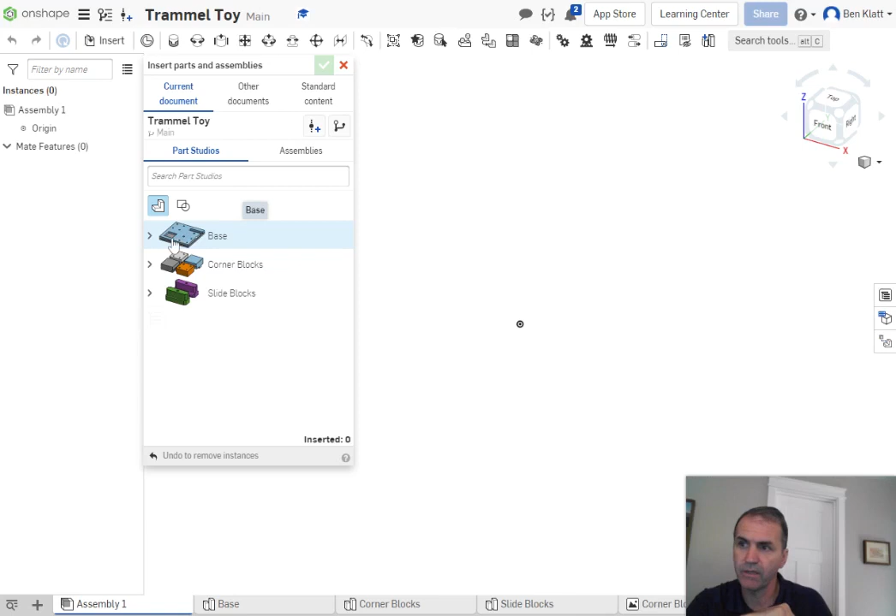So let's insert the base. Now, the base consists of two parts. If you expand this, there are two here, but I'm going to bring this in as the part studio that contains both at the same time. So we're going to click on this base and bring it in and click it.

Now, don't do what I'm about to do. First I'll say okay, but I'm going to show you that these are two separate pieces within the assembly, so you can actually take one and move it. Don't do that though—if you did, let's hit undo and get it back so that it's together. Now I want these to hold together as they are.

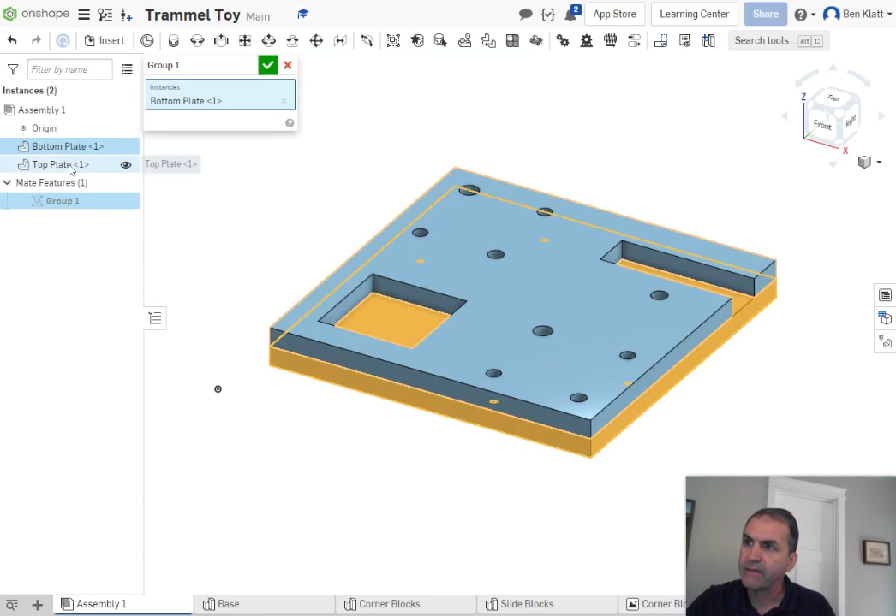So the way to do this is to come up here where it says group, and the instances I want to group are the bottom plate and the top plate. Hit OK, and now those are held together. We could have mated them, but it's just easier to group them so they stay together.

Now, it's also a good idea—turn off that origin, it always annoys me—to have a bigger piece fixed in an assembly. So we're going to take either one of these, it doesn't matter which one, and hit fix. It will show that that is held in place, and now I can pan, but I can't move it apart, okay.

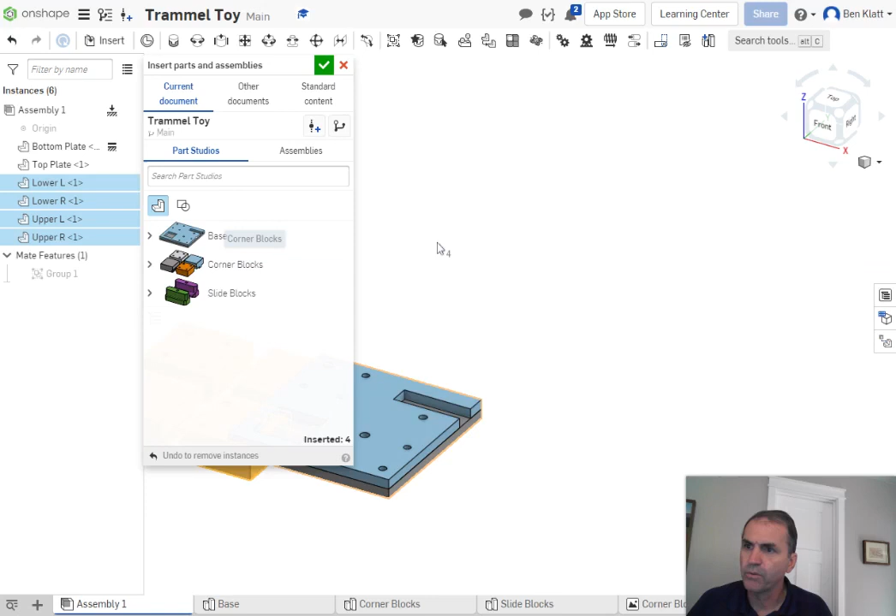All right, now we're going to bring in our four corner blocks, kind of like we did before, at the same time. I'm going to zoom out a little bit just so I can have some room in here. We're going to insert those corner blocks. Now again, I'm going to choose all of the corner blocks at the same time, not individual pieces, and bring them in. Click, now say OK.

Well, before I move anything, I want to group them together just like we did the other ones. I'm going to group the four blocks—lower left, lower right, upper left, upper right. All four of them are going to get grouped together. Okay, so now they move together as a unit and they're locked together in that position.

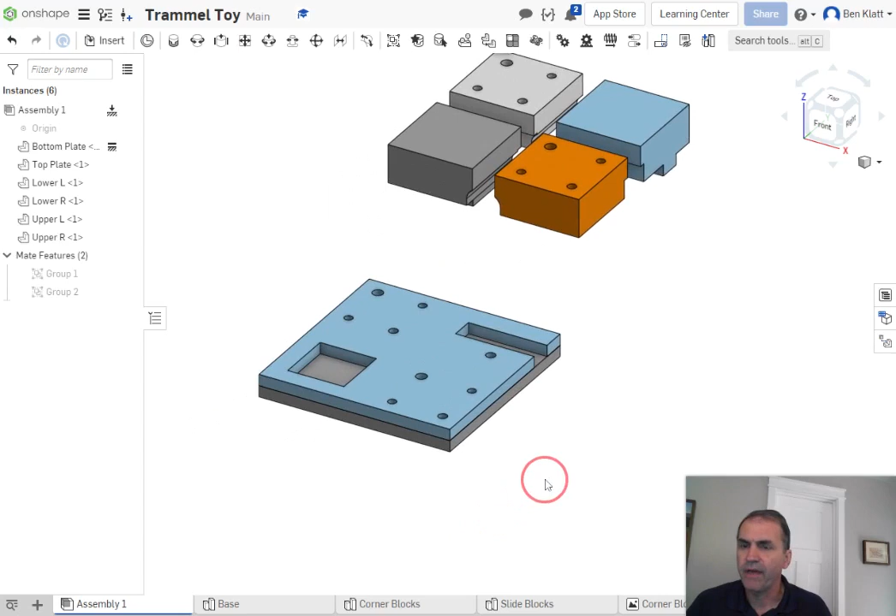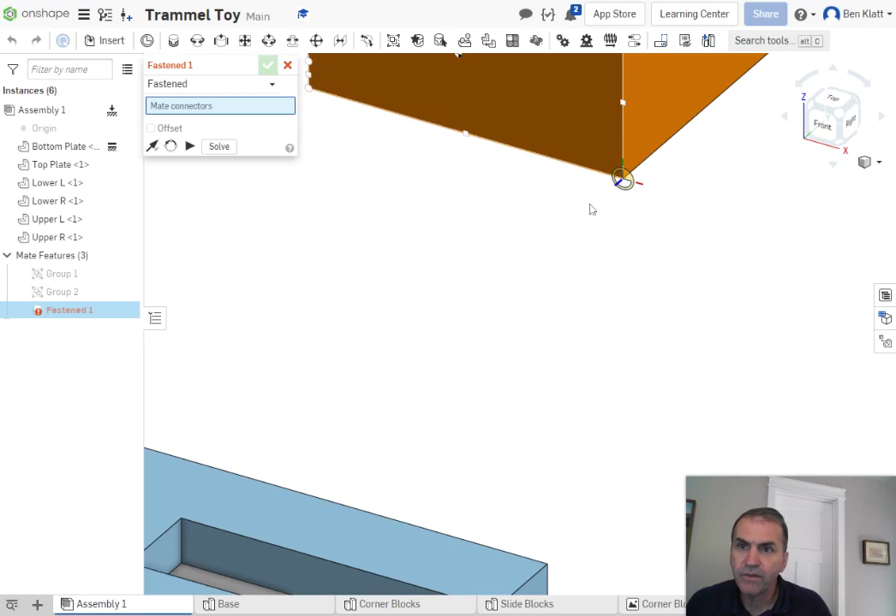Now I only need one mate since I grouped them to hold these down here. I think I'll just choose this corner right here and that corner right there to do my fastened mate, which will lock those together. If I zoom in, I've got to make sure that your little mate icon shows that right now the blue little z-axis is going this direction, which is what I want. Click, and I need to make sure that axis goes the same way down here on this corner.

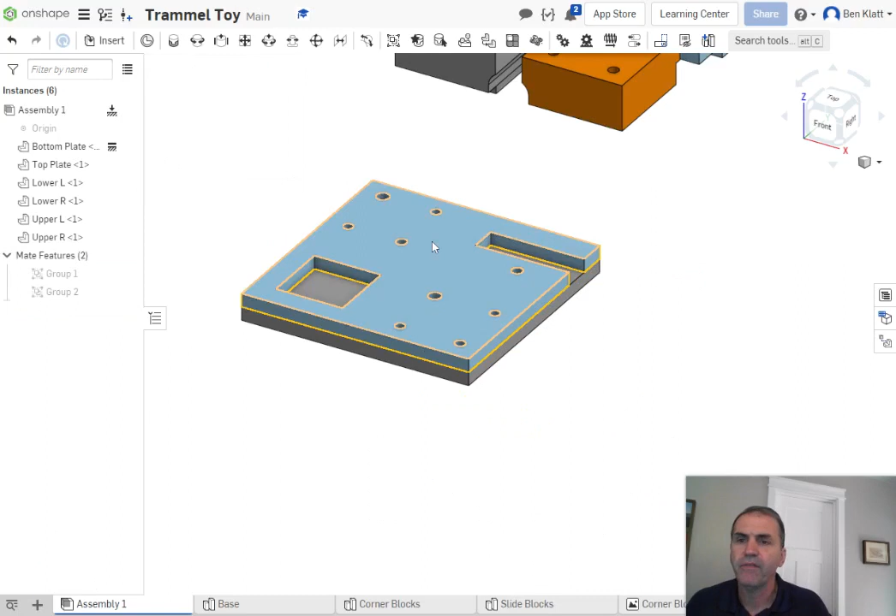Let's do it wrong first—let's have it go the wrong way. Whoops, you know, now it goes the wrong way. Now you might be able to do something like, wait, which way do I flip it? I don't know. So rather than that, let's just make sure we've got it right the first time.

Fasten mate—make sure that the little arrow, the axes, are pointing the same way. Sometimes you have to hover around a little bit. And that looks good. All right, cool, so now those guys are locked together.

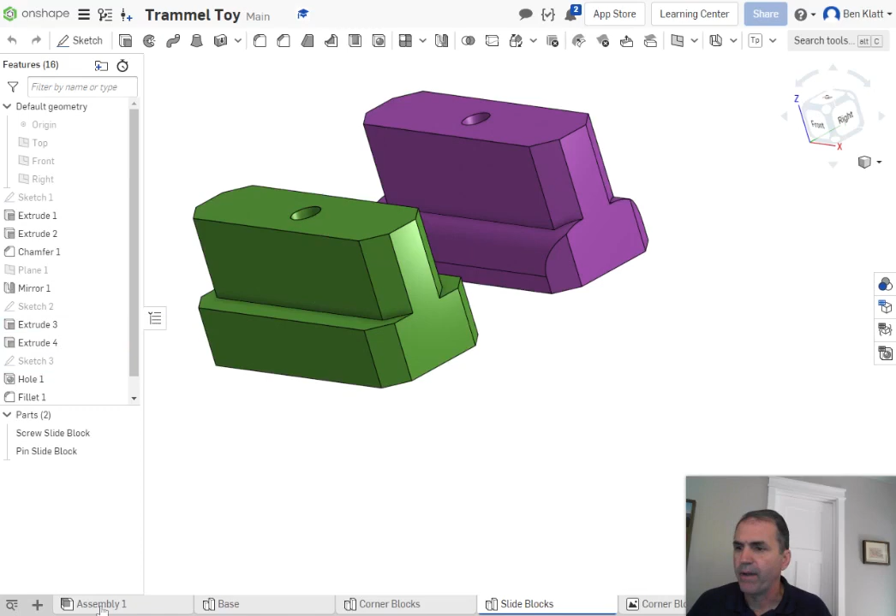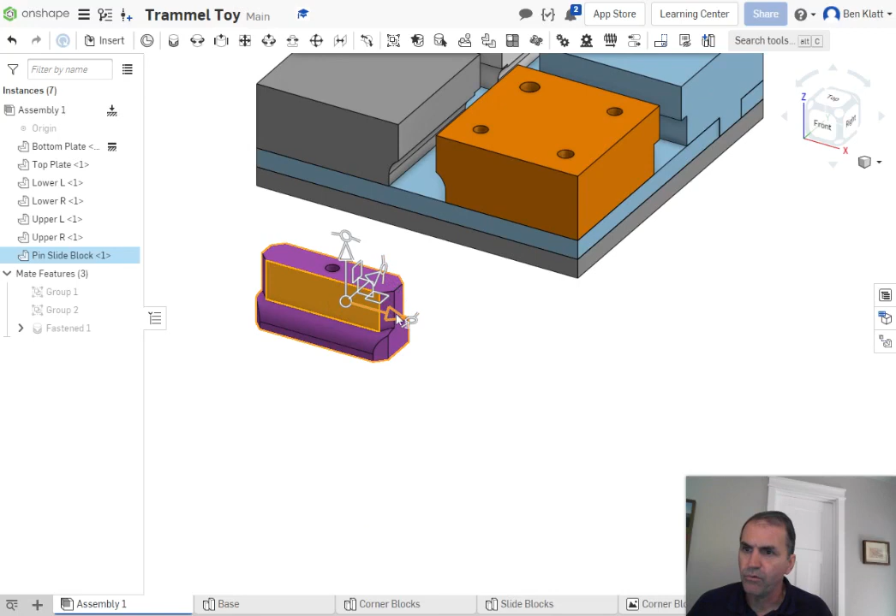Now, we're going to bring in our slide blocks. I'm going to do these one at a time. So, whoops, I didn't mean to go back to that—I meant to stay in my assembly and insert slide block, but this time I'm going to expand that and bring in just the pin slide block. Bring it maybe down in there. Now, if it bothers you that it's not facing the right way, don't forget that you can click on a part and use these tools to move it or rotate it. So I can move it around so that it's facing the right way. I don't have to do that.

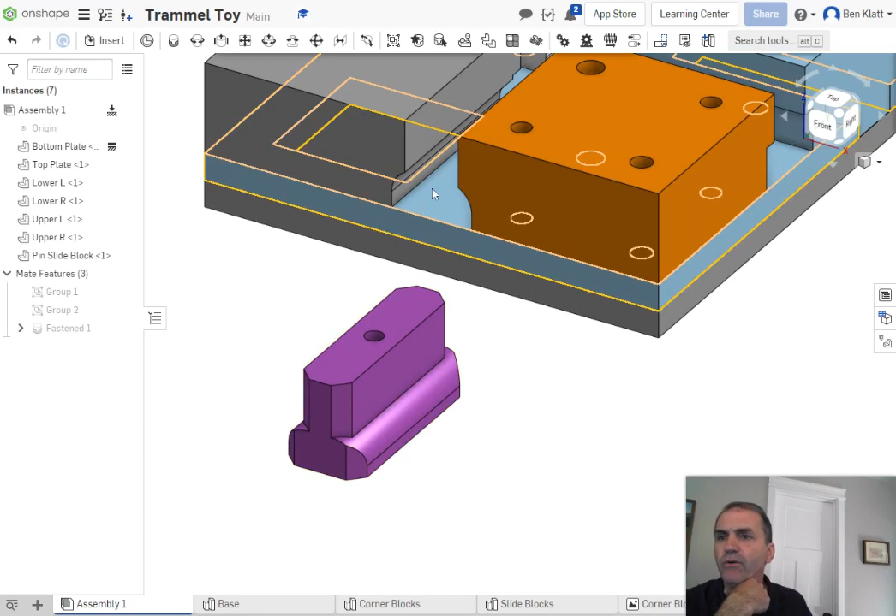But it just makes it a little easier to see. Now, this time, we're not going to do a fasten mate because these are called slide blocks for a reason. They slide, right? And if you'll remember, there was some clearance that we created when we made these so that it's not fitting perfectly in the space, but it's got a little gap.

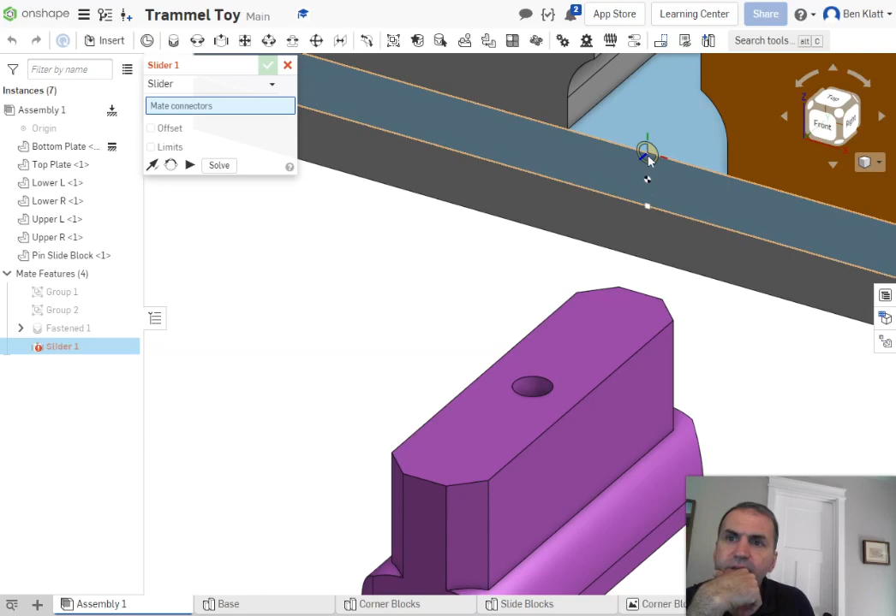But it will sit down flat on this surface and in the middle, hopefully. So we can take our, up here is a slider, that's what we want. And the two mates are going to be, one is going to be right there in the middle. Notice it lines up with the center of that click. And the other one will be the middle bottom of this one, making sure again that it faces the same direction with that blue Z-axis.

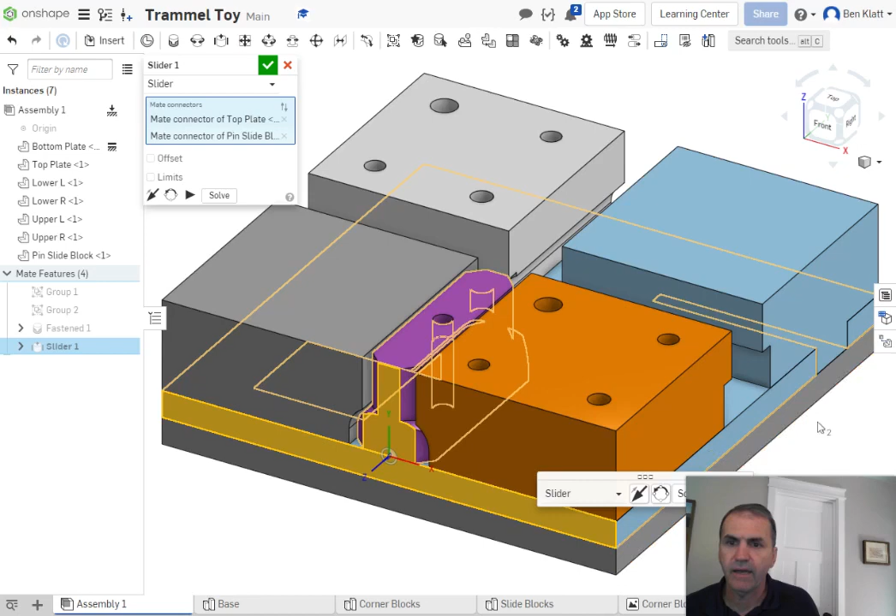Click. Now, it went away, but I'm going to be able to zoom. Okay, bring it back and say, okay, looks good. And now, once I've got that done, I don't want another slider mate right now. You should be able to grab that part and slide it along that axis that we created.

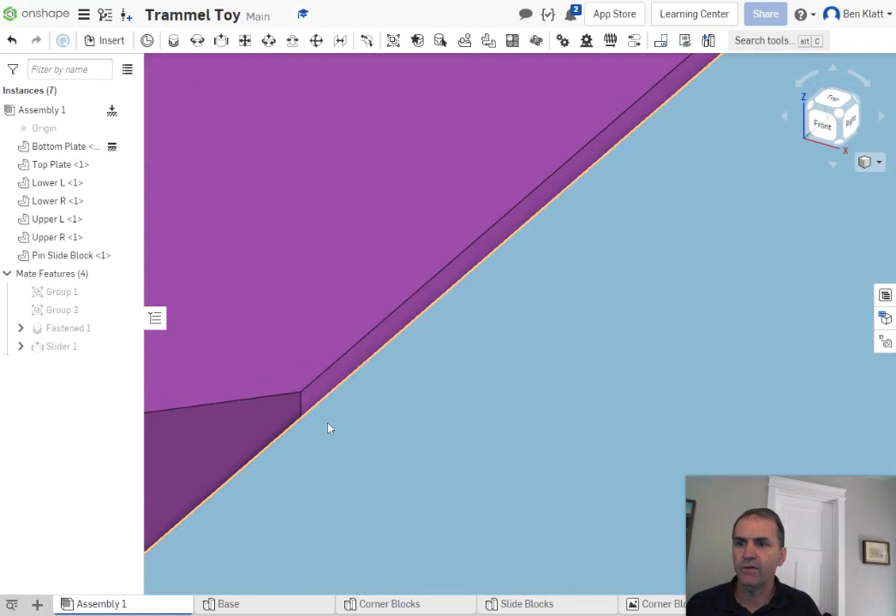Cool. Now another little side note is that we did make this, notice that this piece sticks up above, and that's by design, it's on purpose. And if we look really carefully, I'm going to look at the back side, notice that there is space. We created some clearance for that to be able to move around in there, okay, on all sides. There's a little gap there, a little gap there. If we were to 3D print this, we need to have some clearance.

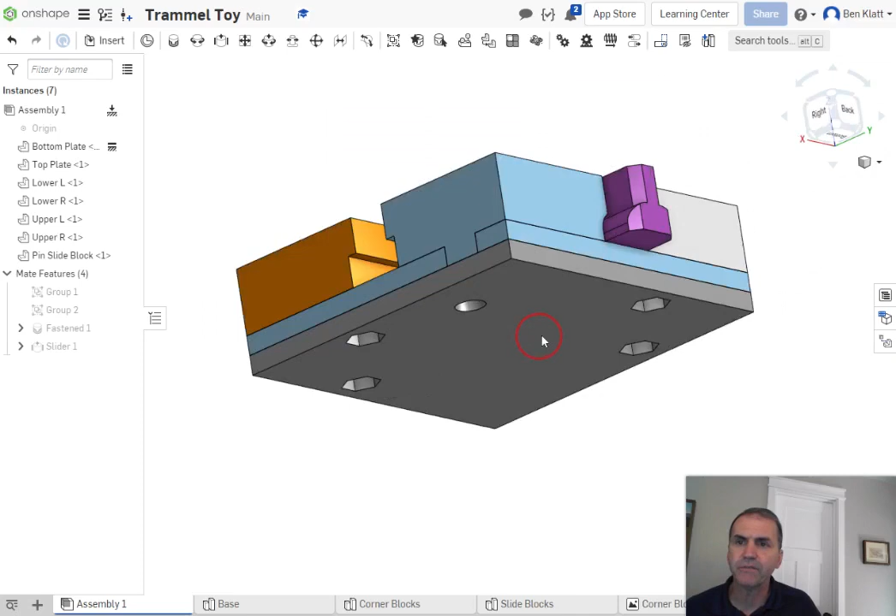All right, there's slider number one. Slider number two, I'm going to show you a problem that we have with this. When we bring in slider number two, whoops, let's insert the screw slide block. Bring it in here. Now it's already kind of oriented the right way.

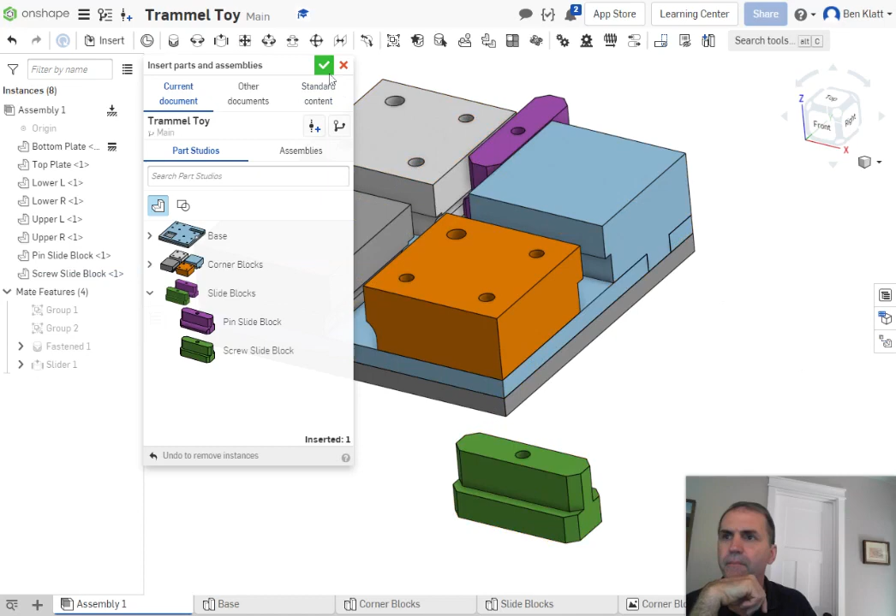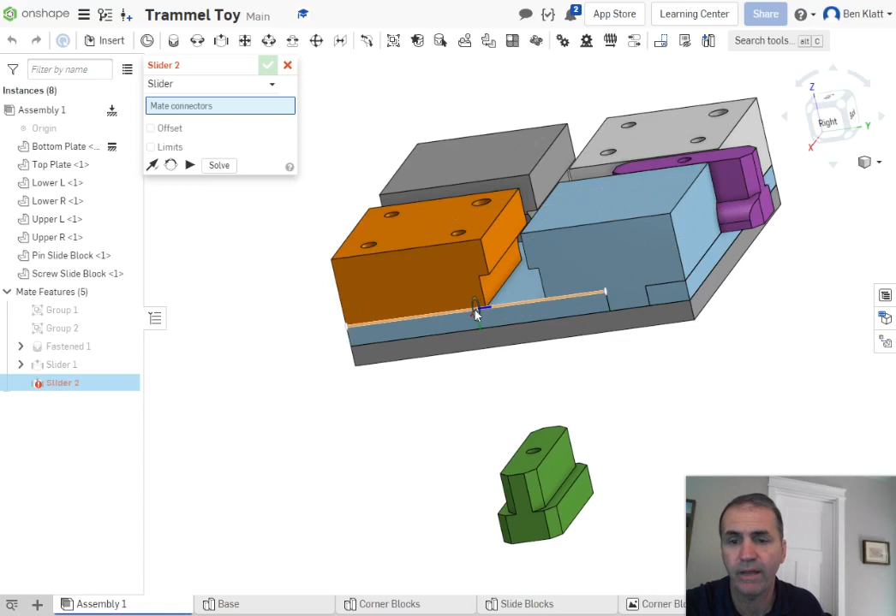Now, if we do this on this side, we have a problem, because if I go to do a slider mate and I go to put my piece on here, the problem is that the middle of this piece, because it ends over here, is not in the right place. So we have a problem. Now we could move this over to the other side, where we do have nothing interfering with the middle of this, but because we may need this later on, let's show how we can solve this problem.

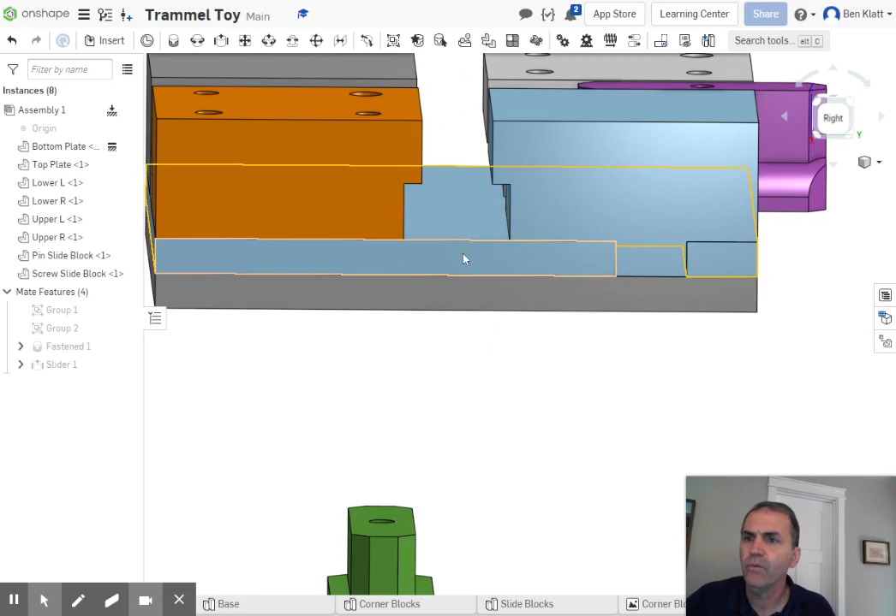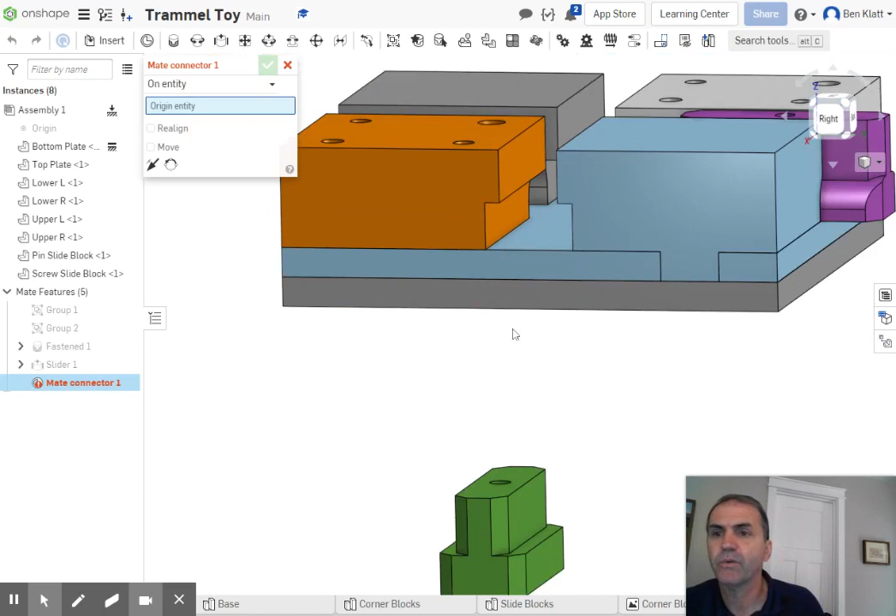So we don't have the ability to put the slider thing there, but we can make our own mate connector. So up here at the top, there's this little thing that almost looks like Pac-Man to make a mate connector. Now, it only wants to put it the same as those other ones, but I'll be able to move this. So we can put it in the middle, right on the top of the bottom plate. Click, okay? But now notice I can move it.

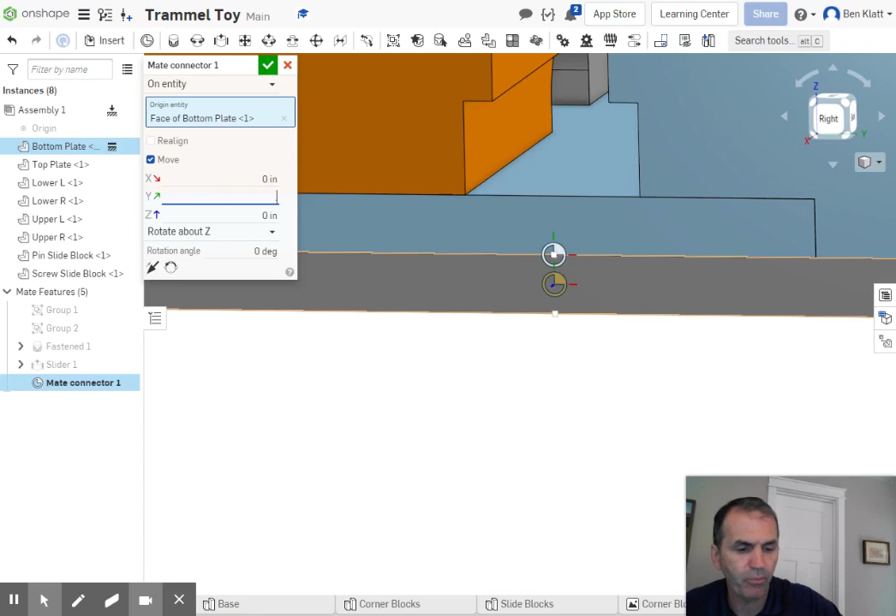So I'm going to move this, and it says, which way do you want to move it? Well, the green axis, the one going up, is the y-axis. So I'm going to move that in the direction of that, 0.25 inches. Enter should give me a little preview, and that is where I want that to go. So I've created my own little connector for that.

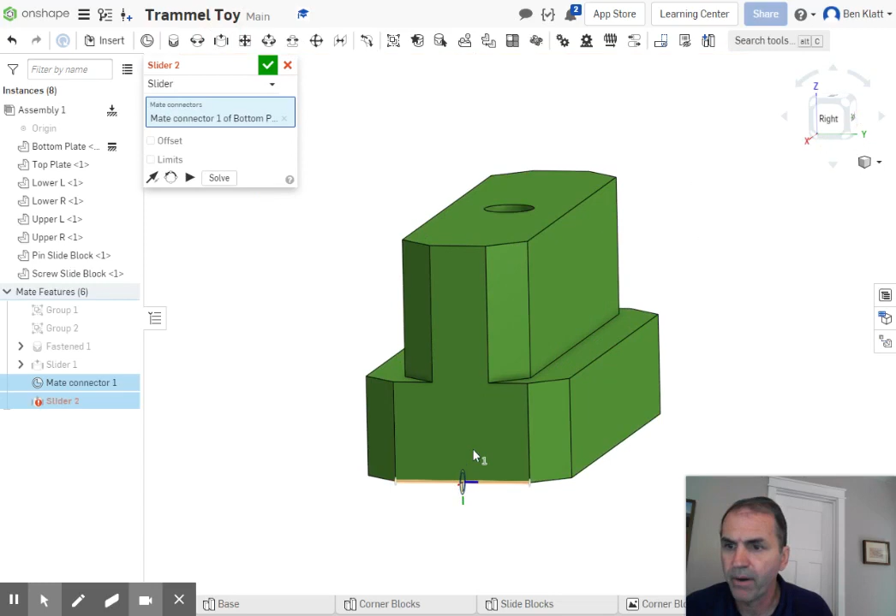Cool. All right. Now next is we're going to create a slider mate again. And this time we're going to use that same connector that we just used and the bottom middle, just like we did before, of this one, making sure that the axes go the same direction. And good. Okay. Now that mate connector will show up until I go down here and just turn it off. All right, so now I've got my slider and my slider. Cool, that's going to work out really well later on.

Unfortunately, we're not going to get to that today because it's going to take too long, but we will get the crank arm on there and get it all moving. All right, now we are missing our pins and our little hexagonal pins.

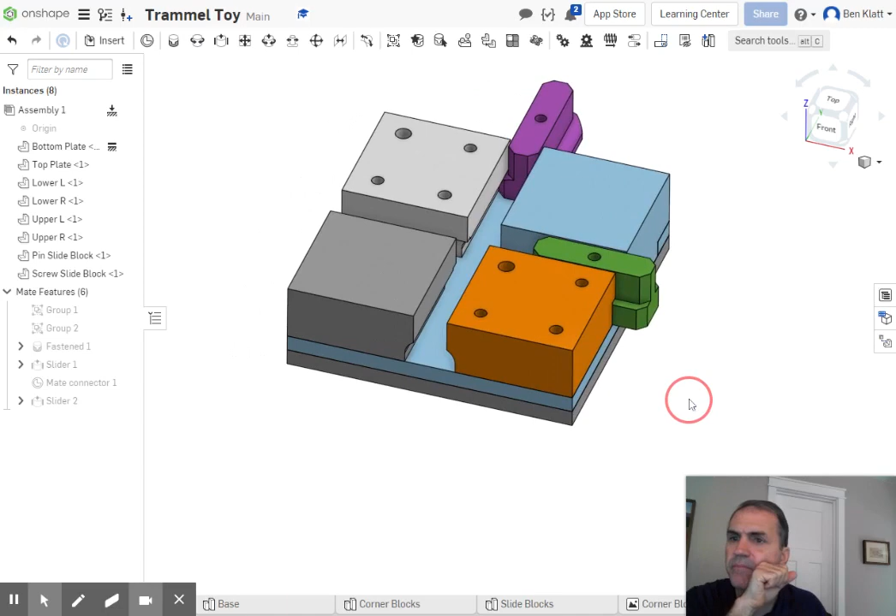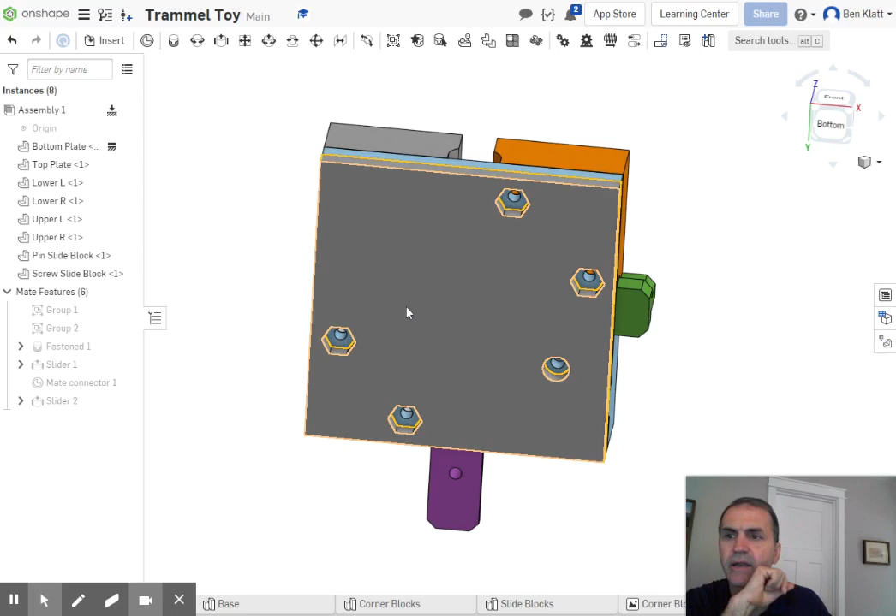Now these are not bolts, they're pins with a hex head. You can't do a bolt because how are you going to screw that on there unless you bolted everything on there first and then glued this plate on next, which is a possibility, and that's a way that you could get that done. And maybe that's the way this is put together, but I am going to do this.

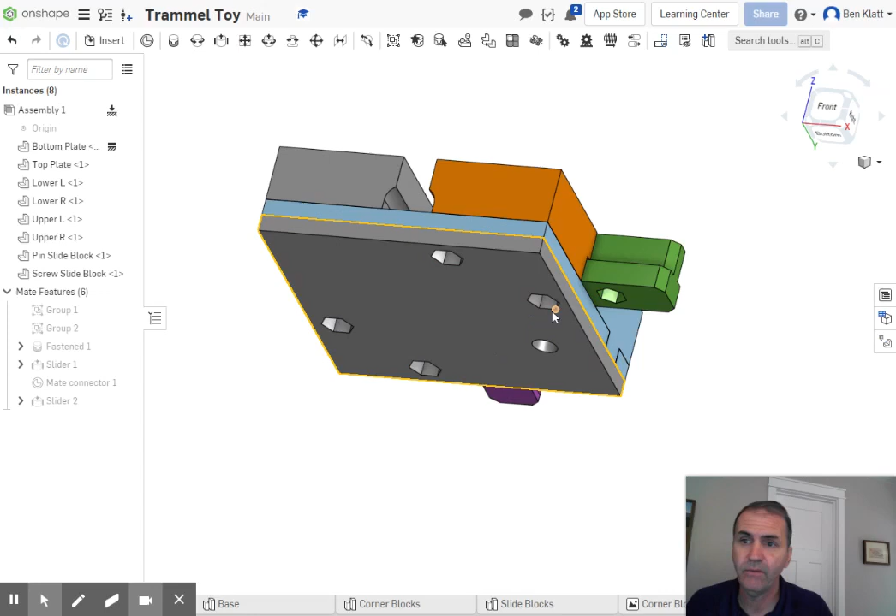I'm going to build my own pin and my own hex pins. Now this one also has a hexagonal shape, but these two hexes are actually different sizes, so we're going to have to make those separately. All right, now the easiest way to do this, I think, is to use that sketch again that we made these hexes on and use that rather than having to resize and measure and all that sort of stuff.

So let's do this and start a new part studio. We're going to call this part studio rename it, and call it Hex Pin Block. We need to call it something that I recognize is different than the other pin we'll make later on. Now I'm going to sketch on here, but first let's go to the base.

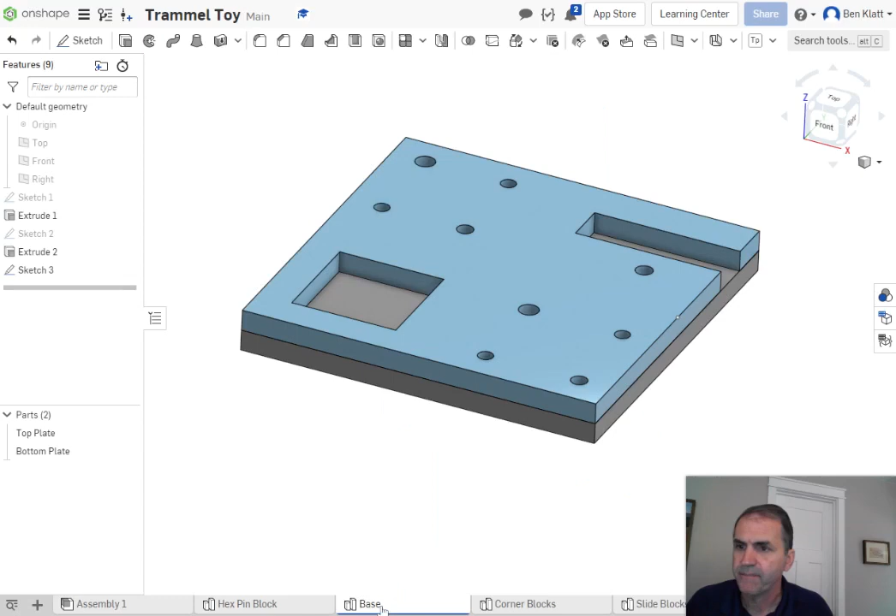Somewhere is a sketch that has these hexes in it. If you hover over, it's not sketch 1, for me it's sketch 2 - it might be different for you. I'm going to right click on that sketch that has those things and hit copy sketch.

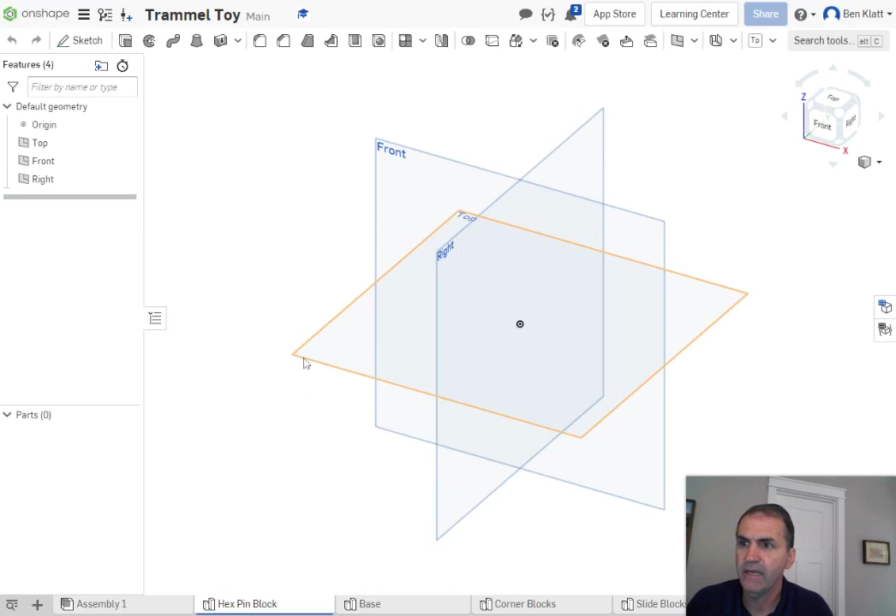Then we're going to go back to our hex pin blocks thing, right click on the top, say I want a new sketch. P gets rid of the planes, N views normal. Actually, we don't even need to view normal this time because I'm going to right click and paste sketch entities.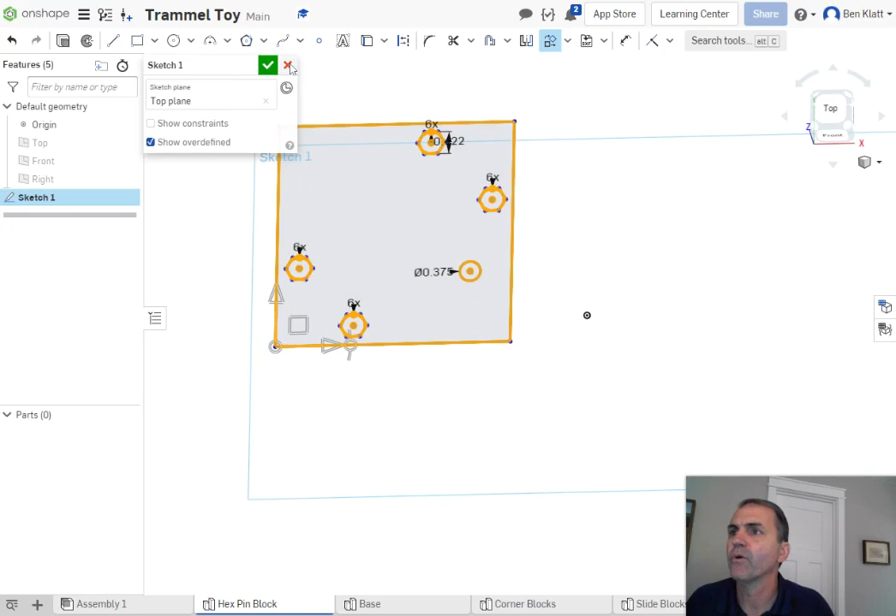Now it does it off there somewhere, up where it's off of the origin, but that's okay. Before I click OK, I'm going to say good to place it. It doesn't matter which one I use - I'll use this bottom one.

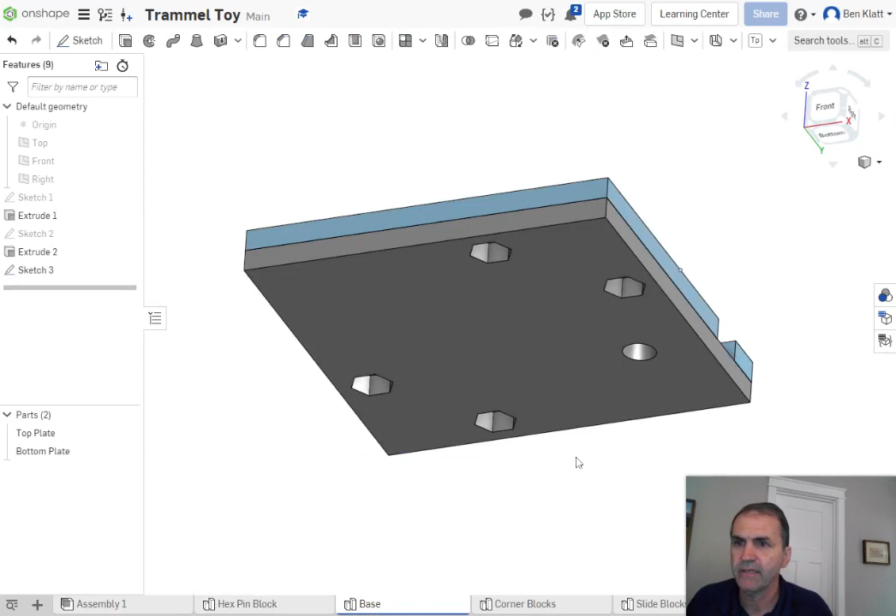I need to draw the circle that's going to be for the pin part because I already have the hex part. So I need to measure that. I need to know what the size of this is. Let me move myself out of the way here.

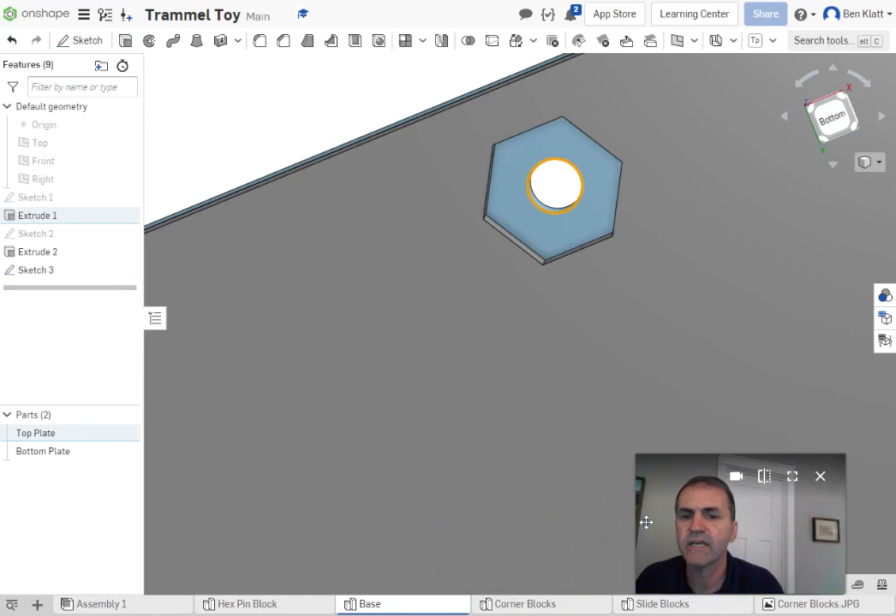Down here in the measure tool, I'm going to measure the diameter of that. I think it's 0.177 - I've got to move myself a lot. Yep, 0.177 is the size of that thing.

So back in my hex pin block, I'm going to draw a circle in the middle of this. It is 0.177. Now that's okay that it fits exactly - we'd adjust it if we were really 3D printing this.

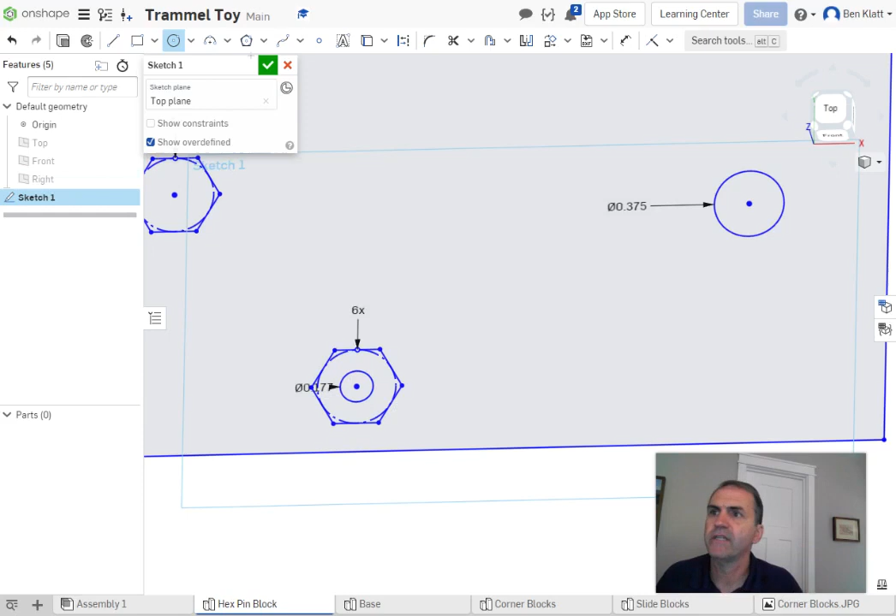Good, got the sketch. And now I'm just going to extrude this part, not the inside, just like the donut. And those plates are 0.25 thick, so it's only going through 0.25.

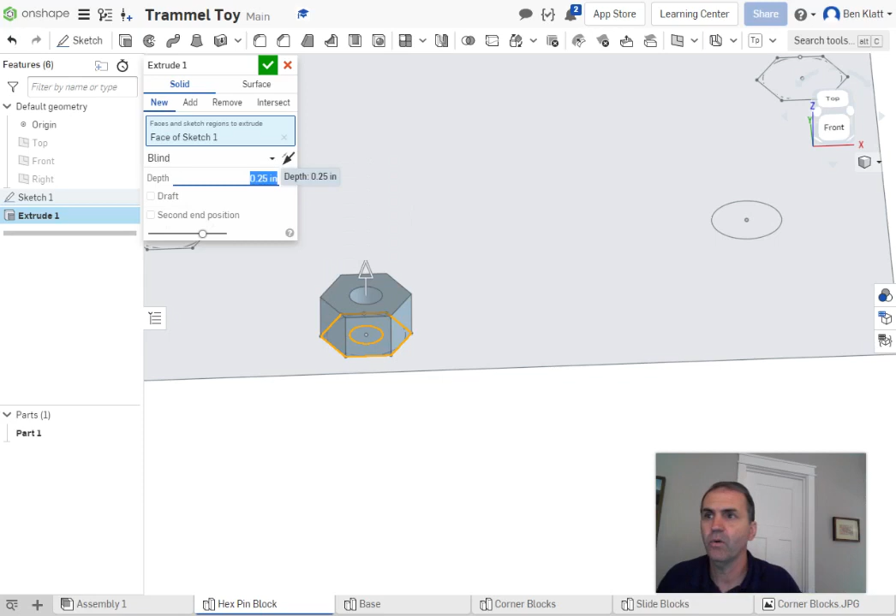Enter. Now the sketch is going to go away, okay, but I can go turn it back on again, and we need to extrude that circle in the middle, but let's find out how much.

So I am going to go to my assembly to see how far it's going to extrude. It's going to extrude from this point to that point. So let's measure that thing - measure that point to that point - is 1.1. Okay, which is, that's how long.

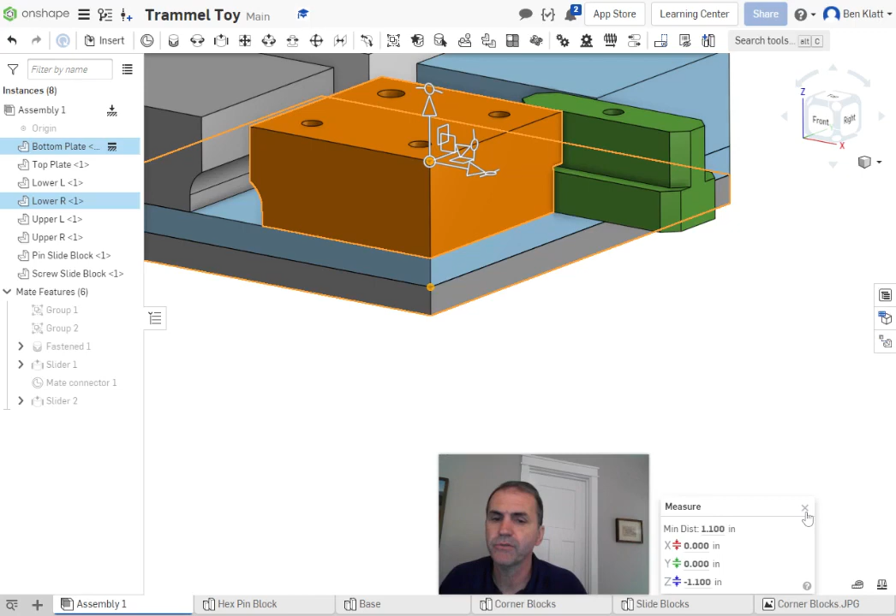Actually, the extrusion is from the bottom, so let me try that again. Measure that again - sure, from the bottom to the top. 1.35 - could have added just 0.25. All right, let's try that.

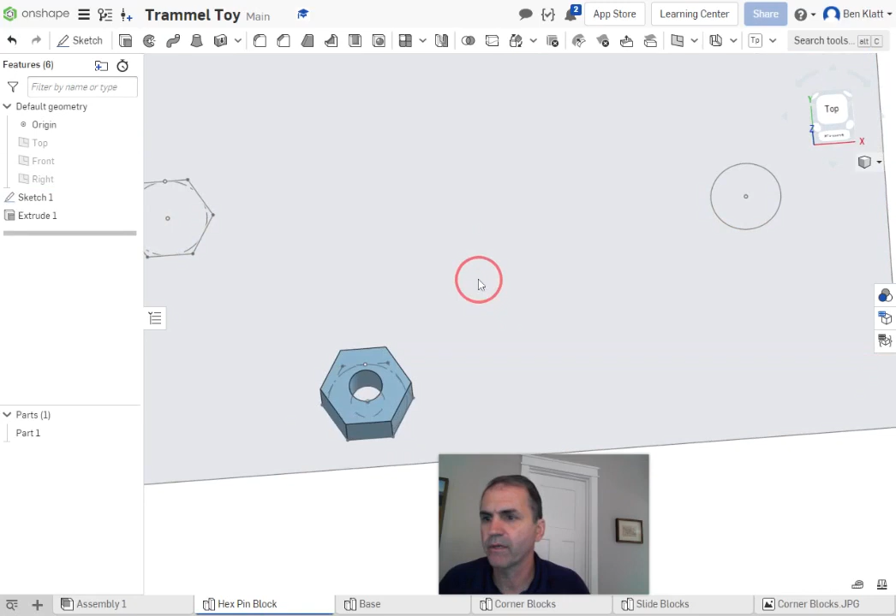Go back to our hex pin block. I've turned back on the sketch that I made that donut looking thing with, and we're going to extrude. I might have to zoom in a little bit to get that bottom circle, that part, and we're going to do 1.35. Okay.

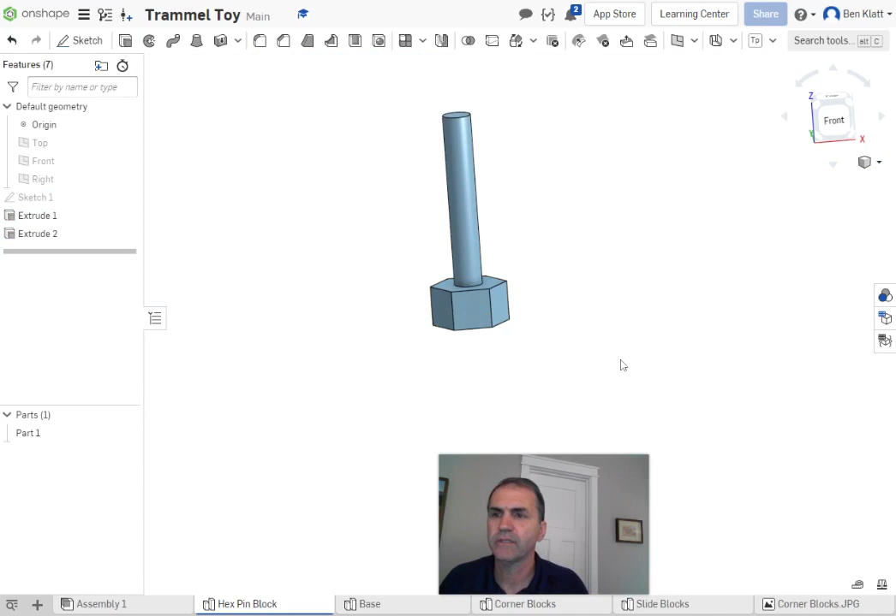Cool, turn off the sketch. So that's not there anymore. Make it whatever color you want. And come down to part 1 and I don't know, I'll make it like orange. All right, you do you.

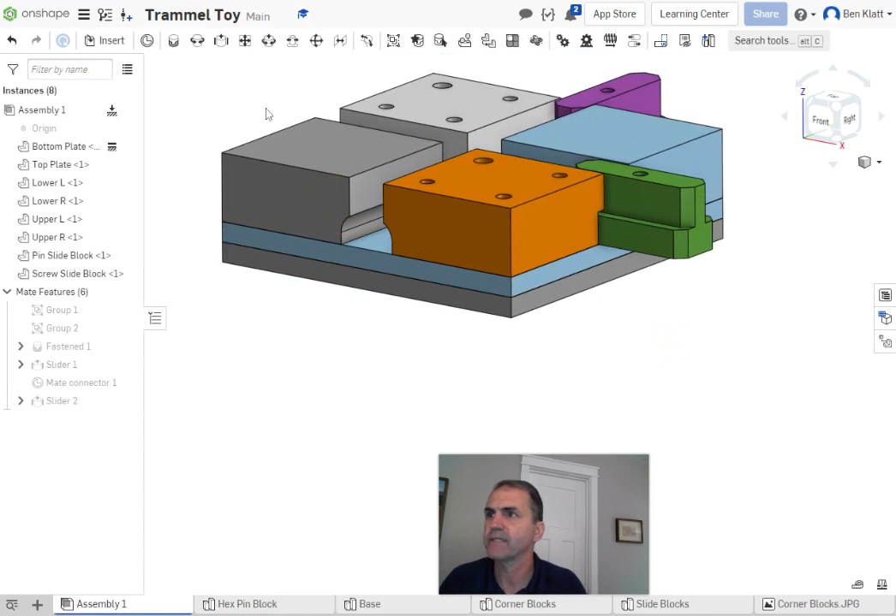All right, so we've got that pin. Now we're ready to go back to the assembly and we're ready to insert the 4 of those pins. So we're going to insert this hex pin, and we need it. I wonder if I can...

Bear with me a second. I'm going to see if I can, when I come in here, it says 1. I wonder if I can right click.

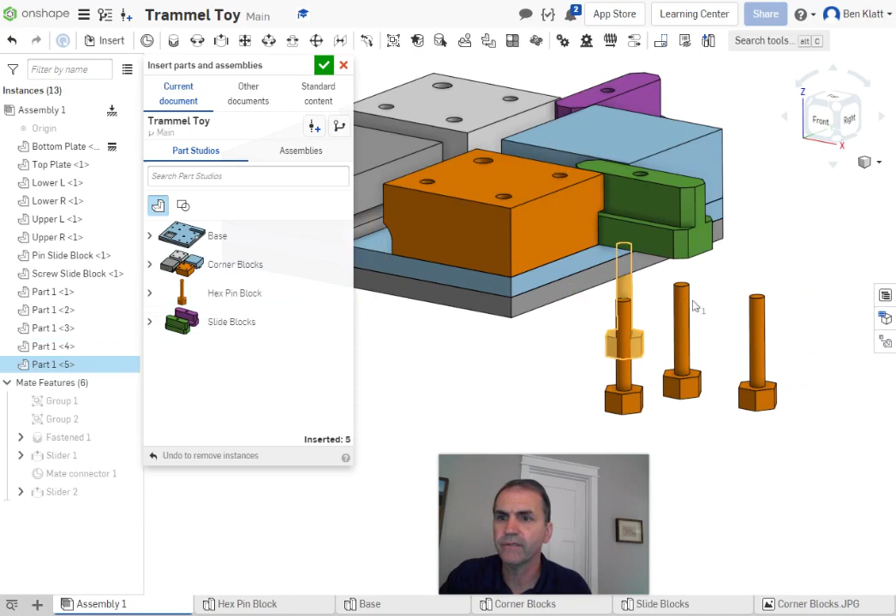Or click and drag. I want to place 4 of them, but I don't want to do it one at a time. The 1 shows up. There might be a way of doing it where you can do multiples, but I don't know how. So for now, if somebody figures it out, let me know.

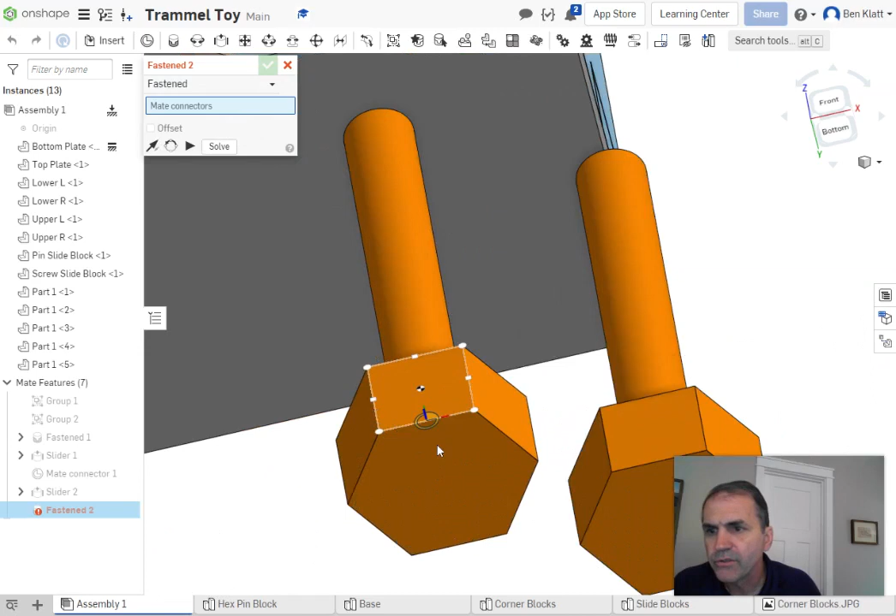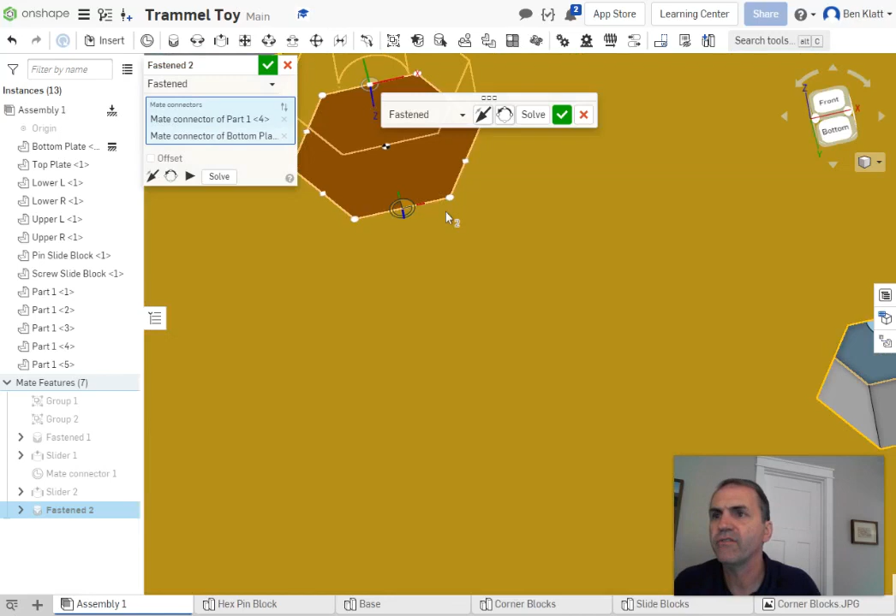All right, cool, so we're doing that. Now to place these in, I think the easiest way is to do a fastened mate with a midpoint and a midpoint. So let's zoom in, get the edge, middle of the edge of that, and the middle of the edge of that, with the axes facing the same way.

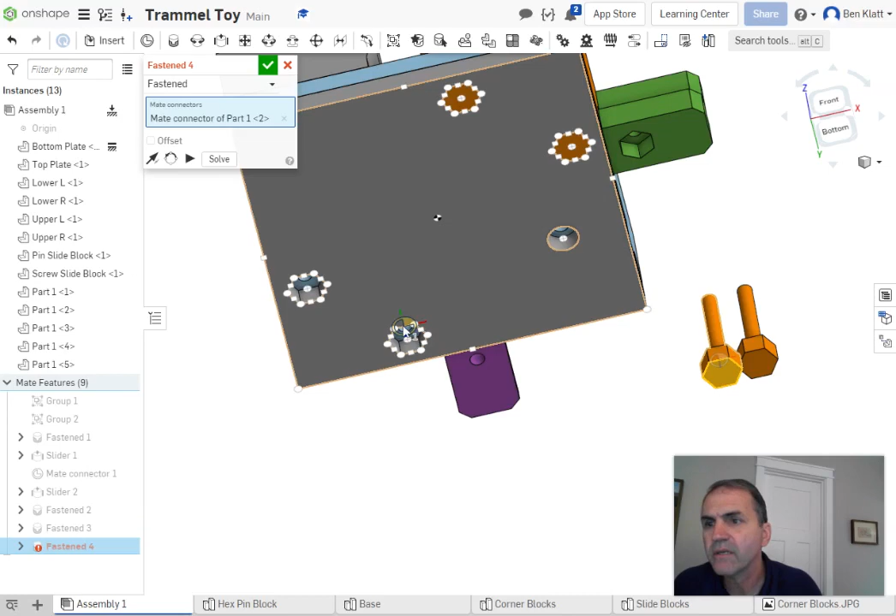Now this is where I'm glad it leaves that fastened mate window open to do the next one. Next one. Last one. Come on, get to the right spot. All right, so we've got all of those. Let's go around. Oops, I don't know how I did that. I got an extra one, but I did.

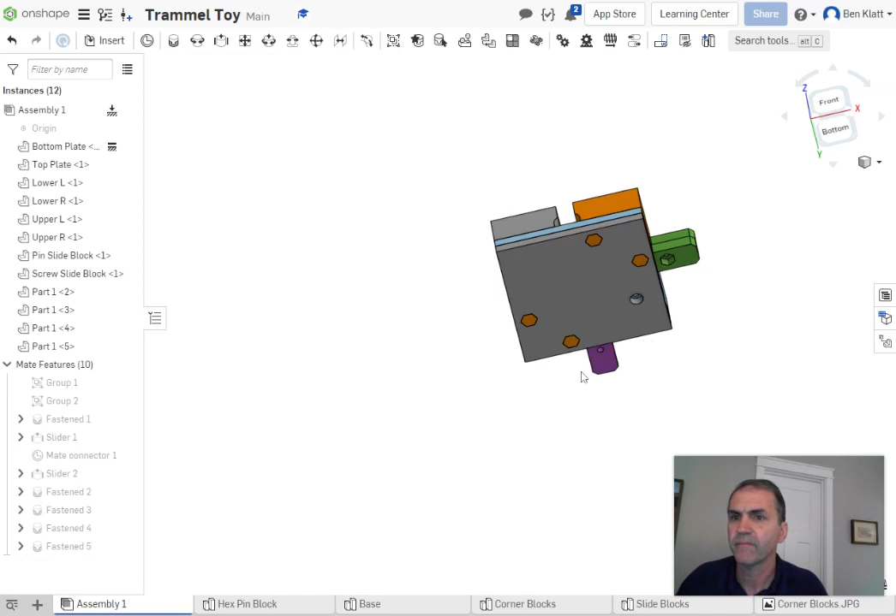Okay, cool, so now we've got our pins in there. Oh, it's the same color as that other corner guide block. I'm going to change the color then. Let's edit appearance. Blue. There we go.

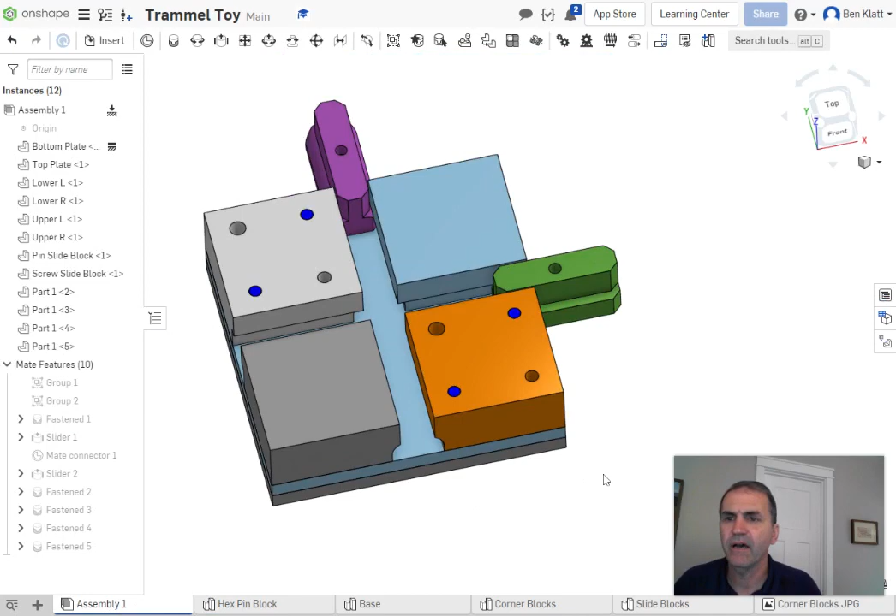Now we need to do these other two pins. Now I'm going to make a mistake on purpose, but I'll explain after. So I need to measure that one, which is 0.191. And we're going to measure the other one, which I already know is 0.23. All right, so we measured those, 0.191 and 0.23.

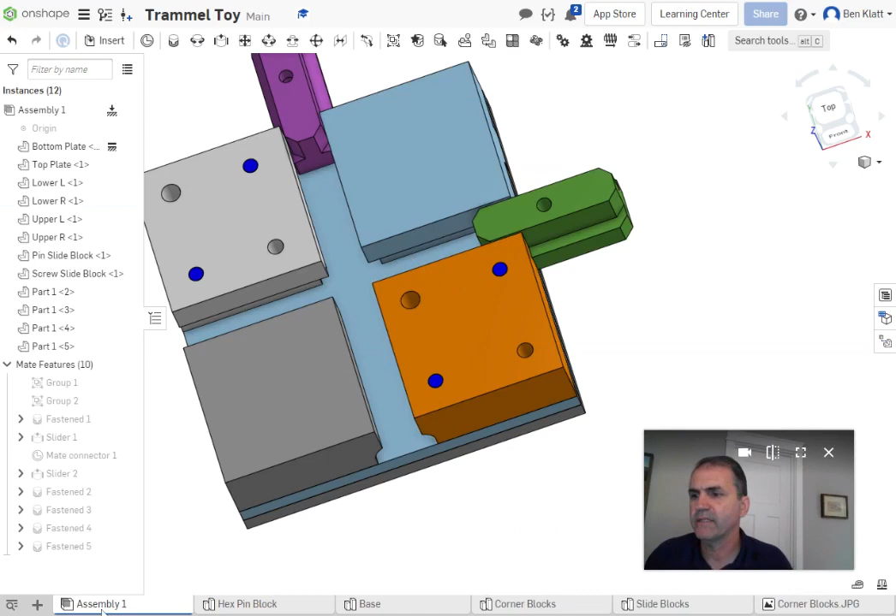Let's make another part studio, and we'll do them both at the same time. Let's just call this pins. Oops, gotta rename it first. All right, and this will be pretty basic. Let's sketch.

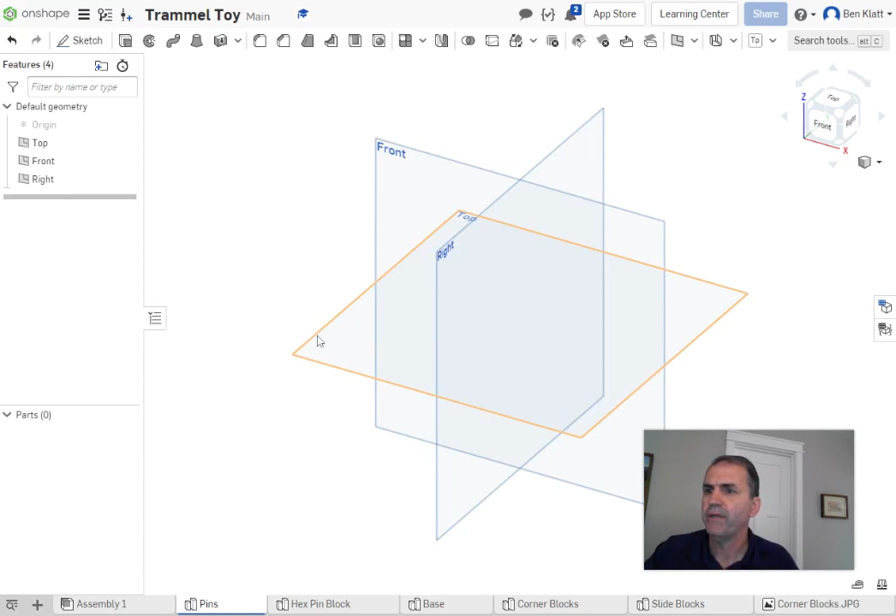I don't know why by default now the planes aren't showing, because I hit P to turn on the planes. Turn them on. Okay, so I'm going to hit P to turn them on. I'm going to start a new sketch on the top. P turns off the planes. I'm going to set it to view normal.

And I'm just drawing two circles, really, really basic. The first one is 0.191, and the other one is 0.23. All right, finish the sketch and extrude those.

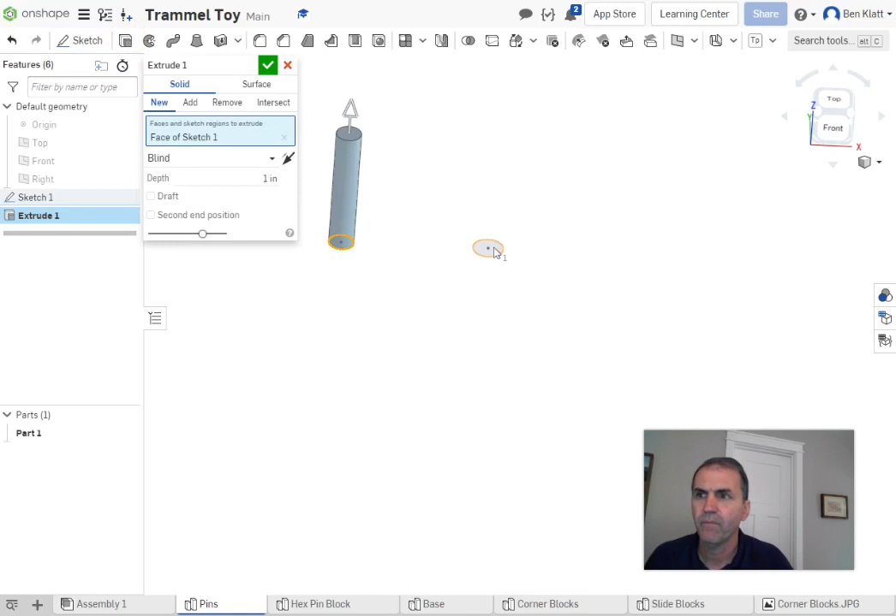We should remember our extrusion was 0.135, and also remember I'm making a mistake on purpose. Or 1.35, sorry, not 0.1, 1.35. Okay, you can change the colors of them if you'd like. I'm going to stick with that.

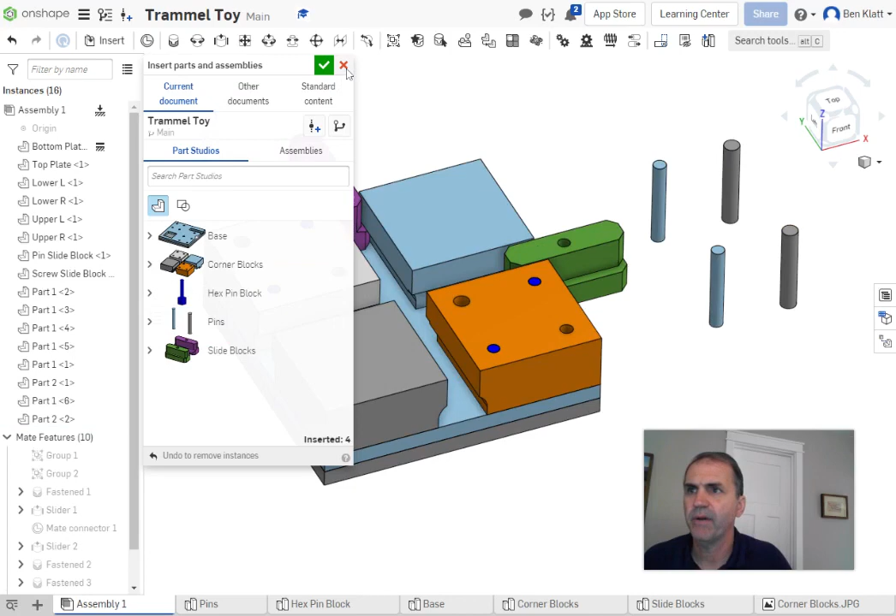And back into our assembly, where we're going to put two sets of those pins in. Insert pins, we're going to put two of those. Okay, now it's a little hard to see, you might have to measure, but hopefully you can see where you can tell which ones are bigger.

So the easiest way to do these is called a revolute mate, because these might spin a little bit, and that's okay, they're just staying in place. So we call it a revolute mate, and you choose the top middle of the pin and the top middle of the hole. Now it might end up sticking out, you just hit flip. Okay, good, and it'll keep my next revolute up there.

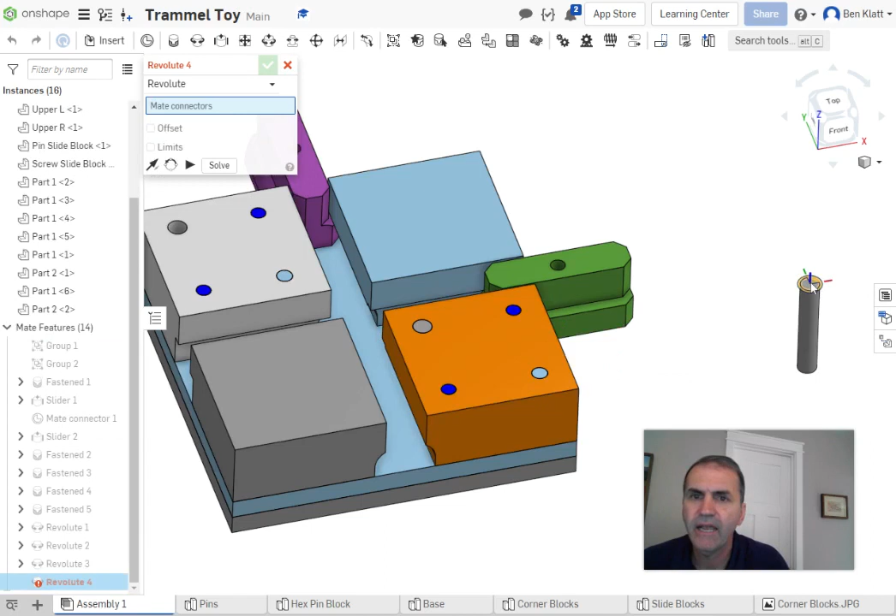Make sure that I've got the smaller of the two holes. Good, and that's got the axis going the wrong way. Let's see what happens if I click that and click that. It might... no, it put it in the correct way. There, and there too. There.

Now, I told you I was going to make a mistake on purpose, and I did. So let's look at the bottom. Oh, look, these pins are coming all the way through. So this shares a space with this base plate.

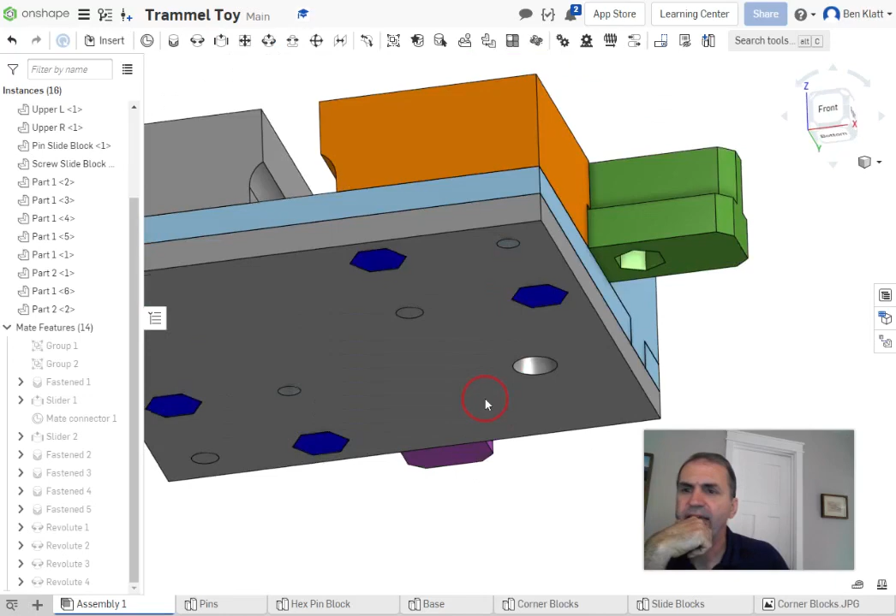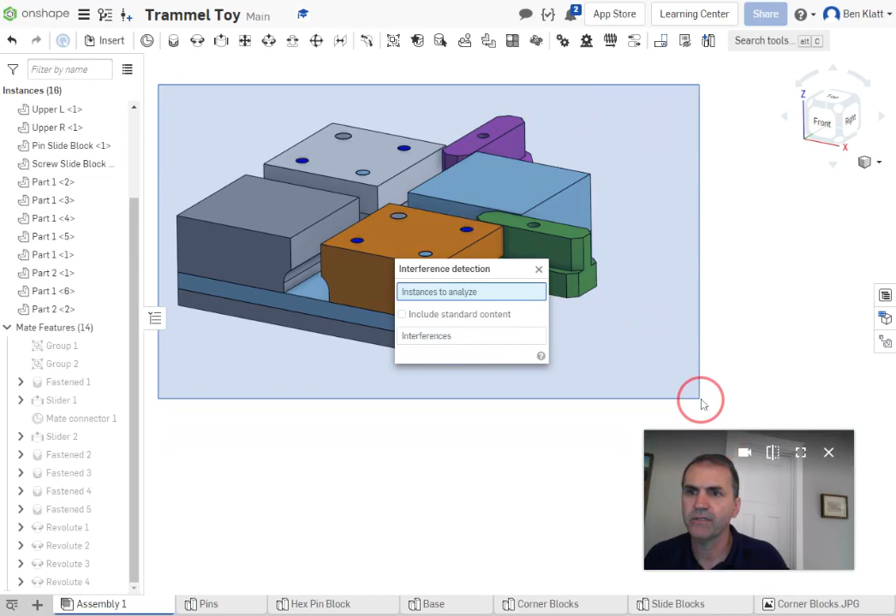Now I'm going to show you something here that's kind of cool, where we can go to the right and do this thing called interference detection. Now it wants to know what we're detecting interference between, and we can select everything by dragging a box around all of it. Okay, and what it's doing is showing me where solid space is being shared. So I messed up on those. We'll talk about interference detection again.

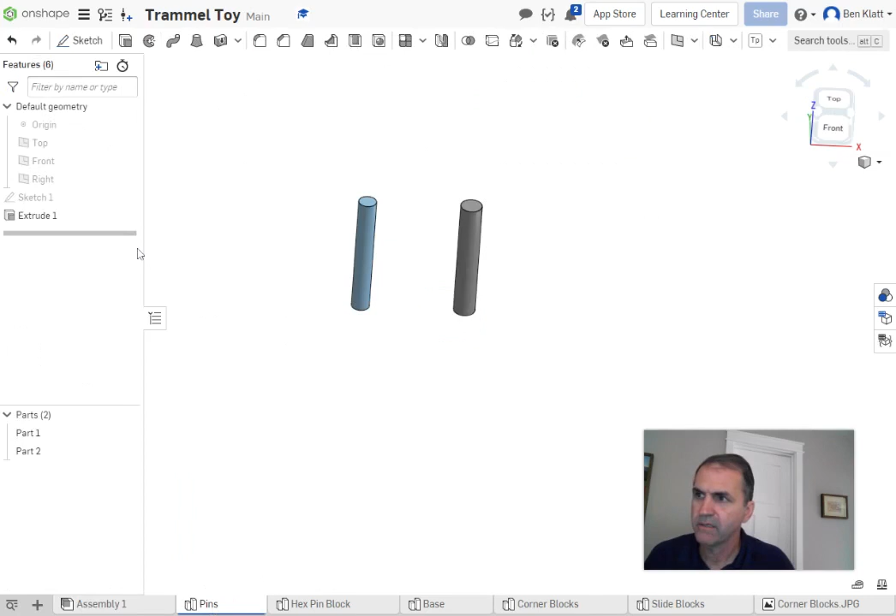All right, so I messed up. The pin length was supposed to be 1.1, not 1.35, but that's an easy thing to fix. Let's just go back to the pins, double click on extrude, and change that to 1.1.

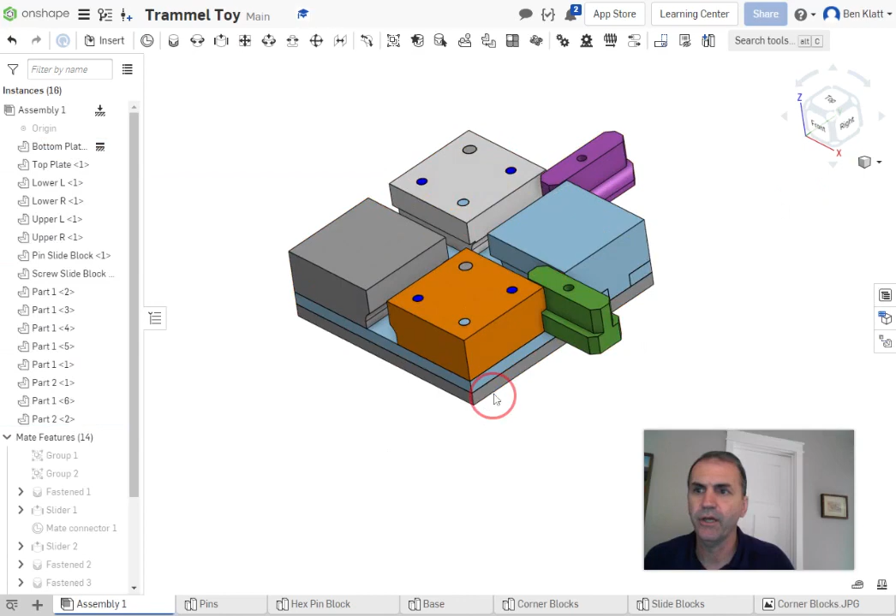Check. Go back to our assembly. Nothing sticking through the bottom. Let's do an interference detection.

No interferences, good, we're ready to go. All right, so we've got our pins, our sliders. We're looking good. The only thing is that we now are missing this one little guy that's holding this block, and this pin over here that we will deal with next time.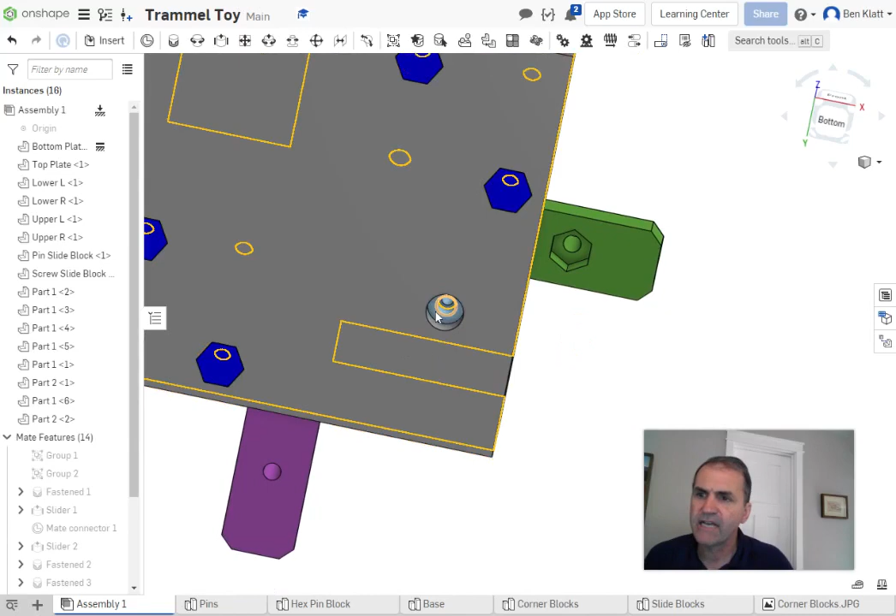So this last one over here, we're going to put a screw in there, but we're not going to build one, we're going to go get one. We've done this before with the selfie stick a long time ago. Let's remember: Insert. This time we're going to go to standard content.

Now, yours is going to look different than mine because mine remembers the last thing that I did. But what we want is ANSI inch standard stuff. When we want to go to bolts and screws, we want our class dropdown to find machine screws, and I want a pan head machine screw.

Now, the size that's by default is really, really tiny, but you're going to choose this dropdown menu and go all the way down to a number 10-24. That is a size 10 screw. It's a little less than a quarter of an inch. 24 threads per inch is what that means.

Let's do a Phillips head instead of a slot. Slot means it would go all the way across. Let's do a PH, means Phillips head. Okay, and our length is going to be 5/8 of an inch, which is 0.625. It should change the thread length to that also because that's by default.

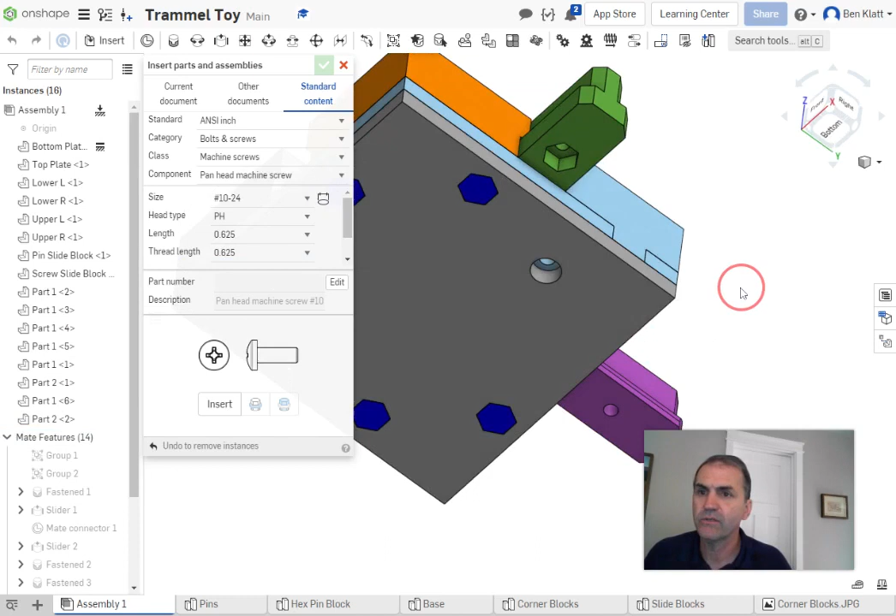Okay, looks good. Now, it's a little tricky to do this, so we're going to zoom in, and where we're going to put this is on that circle where the bottom of this base plate is. So when you hit insert, we're going to go down there to that hole, and it might take a minute for it to show up.

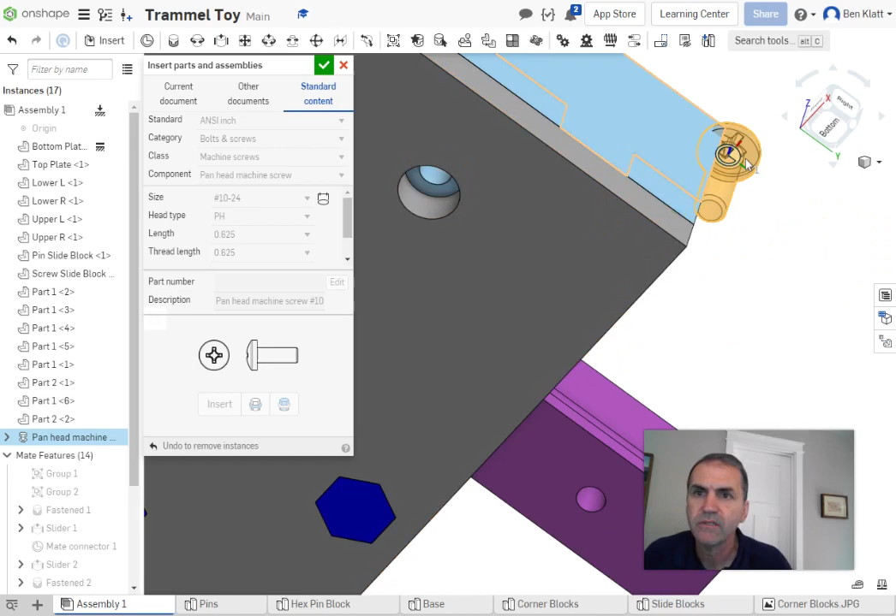Now I don't know where... okay, the screw is floating around until I click again. It's a little hard to, sometimes the screw gets in the way. There it is. So you might have to try this a few times. Click.

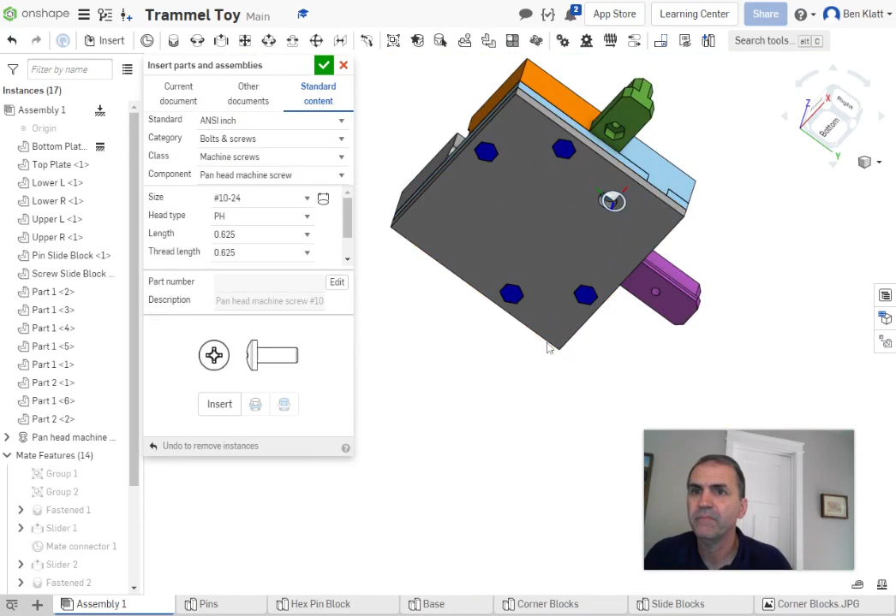And why isn't it wanting to do it? I'm having an issue that you might have too. Oh, weird, look, it went way up in there. So if something doesn't work right, hit undo. Okay, so notice that that screw is now showing up again.

Now, the screw is already there. So that happens sometimes, you might have to play around with this a little bit. I'm going to undo again so that I don't have a screw in here. Notice there isn't a screw at the bottom of my list. I'm going to try that one more time.

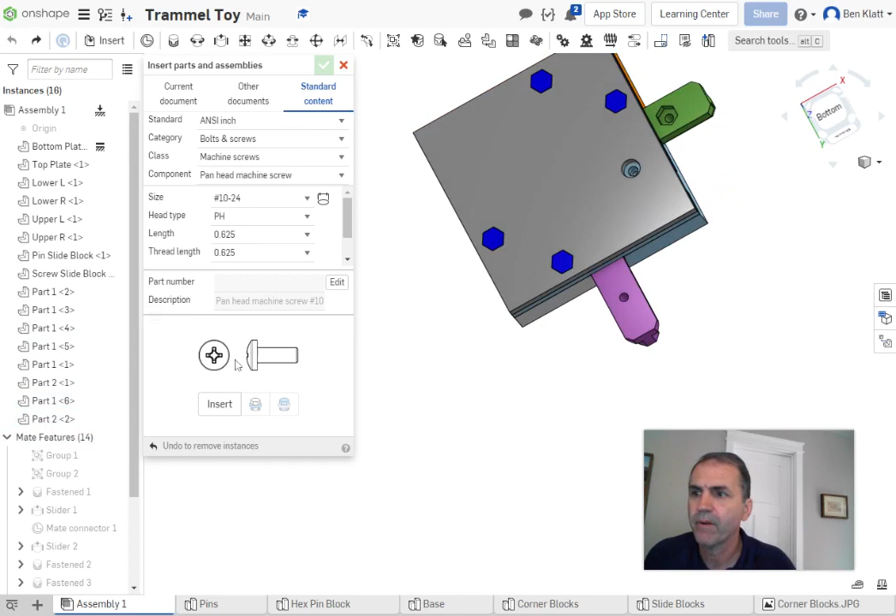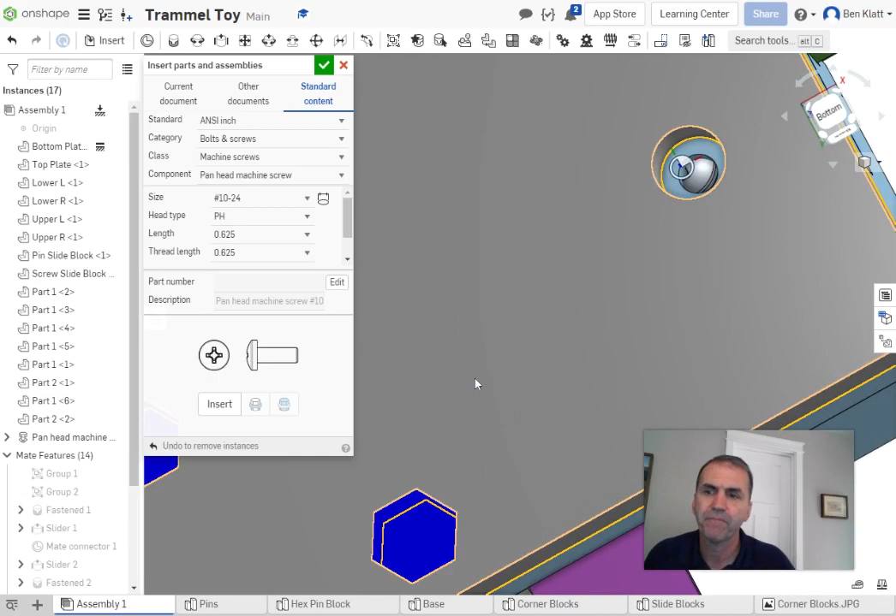Insert. Okay, now it already by default wants to know what I want to insert it to. So I'm going to go down again to try and hover over that spot. And it still is not wanting to do it. Okay, so I'm going to do it a different way. Let's undo. Notice the screw is still in there. Okay, so it's been inserted over here, which is fine. Boom, okay.

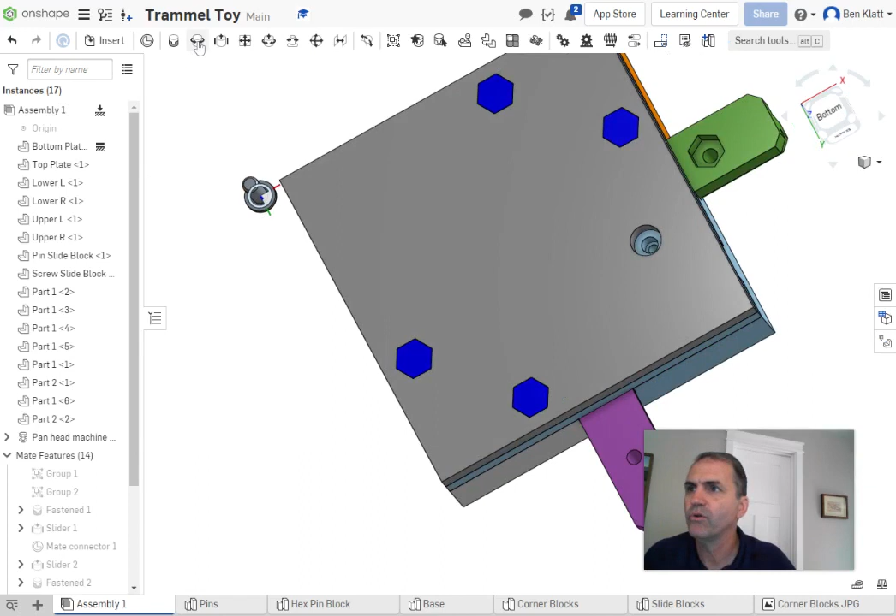Now, it's already got its own little mate, but let's go ahead and do a revolute mate, and I'm going to choose this mate that's already on there. And I'm going to choose this part of the hole. Now, right now it's sticking up. That's easy to fix, I just flip the direction around and click OK. And it should be down inside of there.

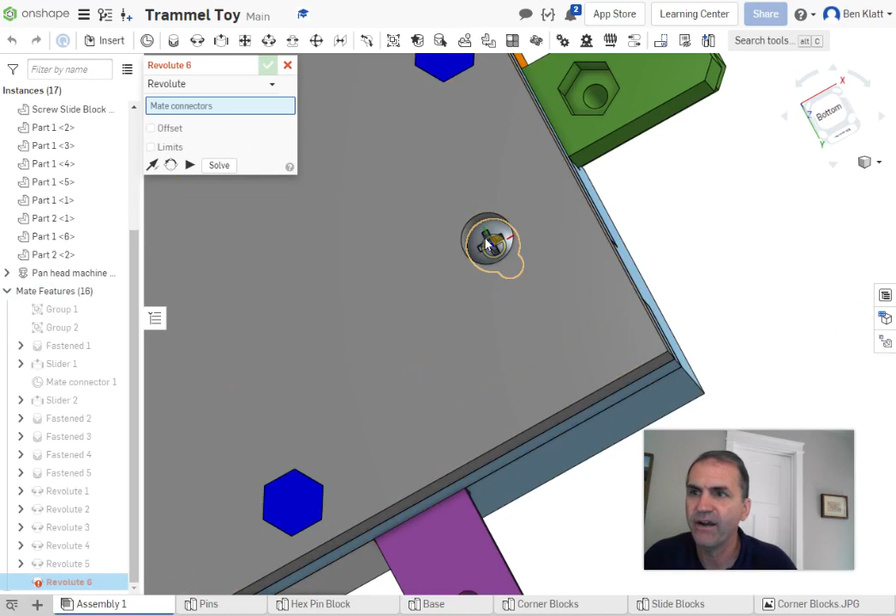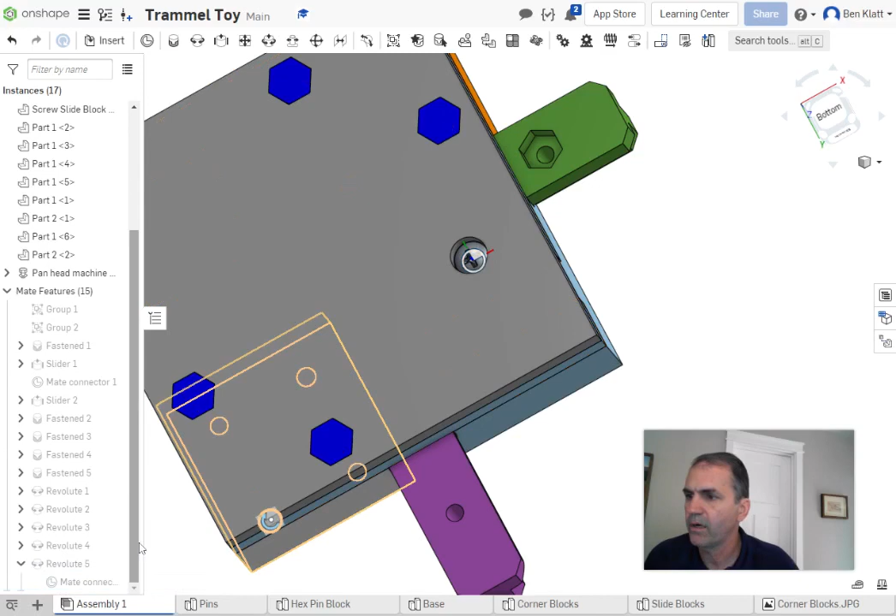And because it's left that little mate on, I should be able to turn that off. Let's see, I don't want the visibility of the screw off, I want just the visibility of that mate. Oh, interesting, let's try down here and see if that one can be turned off. Huh, I don't know why it can't be turned off. There must be a way. Oh, there we go, under the panhead screw, I can hide that. There we go. All right, sometimes you just got to poke around.

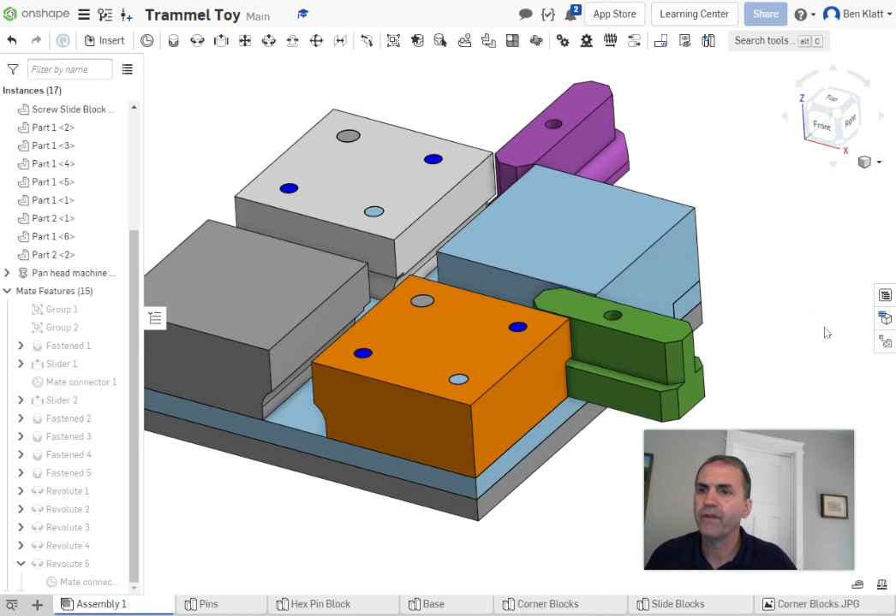All right folks, I think that's getting to be good enough for the day. These videos are not as long as a full-length class because I assume you're going to make some mistakes and have to undo things, which we did. Next class will be for dealing with the pins and the little crank arm, and we'll actually get that dude moving. All right, hope it worked out. See you next time.